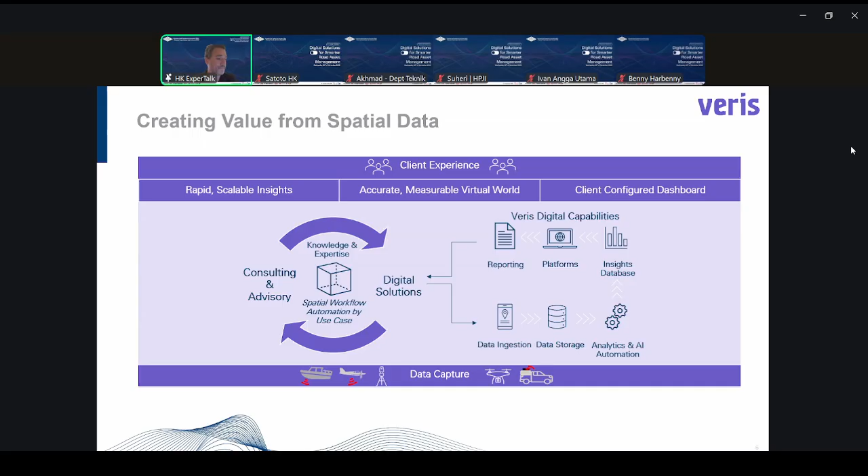We've got a number of solutions, and I'm going to talk about those today - around roadside, bridge side, and photo navigator that I think is hugely relevant to running road networks.

So if we start with roadside, we know that stopping by the road is inherently unsafe. It can be costly having crews out there all the time. There are mistakes made, not deliberately, but just through human interpretation. This is around using mobile laser scanning, which is a combination of laser scanning, directional cameras on board the vehicle, and 360 cameras like you get in Google Street View, using them all to get a better picture of the road. This isn't using just one data source, it's a fully integrated data source, all available through the platform, so the best data source possible to get the best insights to manage those roads better.

I'll take you through some examples of how we do that and how that's saving time and efficiency and bringing in more detail. Now, there's a number of camera-based solutions out there - they're really good, the dashboard-based camera ones, but they often don't bring the metrics that you'll see available through a combined solution with laser scanning that you can get of roads and infrastructure.

So this is a detail where we've got a little bit of a pavement failure along one of the roads here. If we're able to run our analytics along it, we get these red areas where there's a depression in a spot of a road like this. If you're able to present a contour in millimeters of this road at various threshold values, then you can start to understand, with the amount of detail here, what that pavement failure looks like and whether that's an actionable decision.

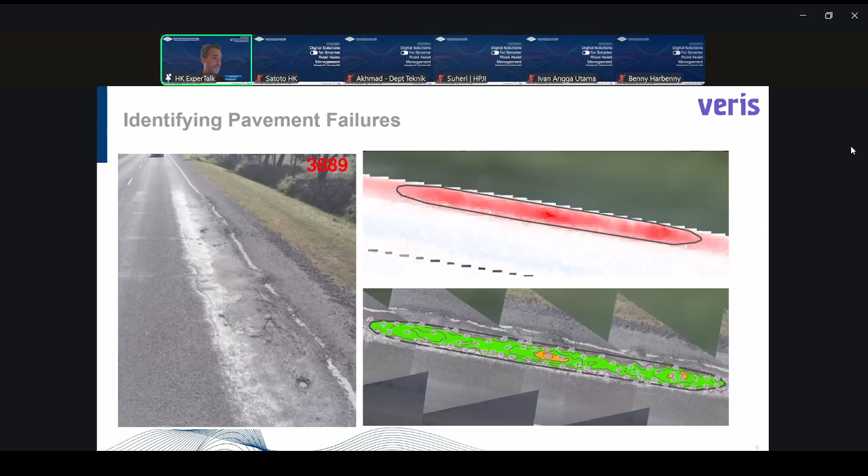Here the -12 represents -12 millimeters in depth. So you can get all those statistics and start to rank them in terms of severity of those various defects on the road.

One of the advantages of the solution, and we focus on the automation, is that we don't have a set kind of view of the software or dashboard. We build a custom-based dashboard with the information needed to manage that road at that time. So you don't get an off-the-shelf one - we work with the providers around what they want to see in it. This particular client wanted to see the severity of those impacts, and you'll see the look and feel of this change.

This was for a different client we were working with that was looking at the road network, and wanted to know the areas and severity scores of those various networks. They wanted a much simpler piece, so we've got the metrics there, and we get scores against things like cracking, rutting, corrugation, pothole. This is all automatically generated from the mobile laser scan data, and you can start to see this across here. I'll give an example of the platform soon, but it's having it in the map view and also in the kind of street view look as well.

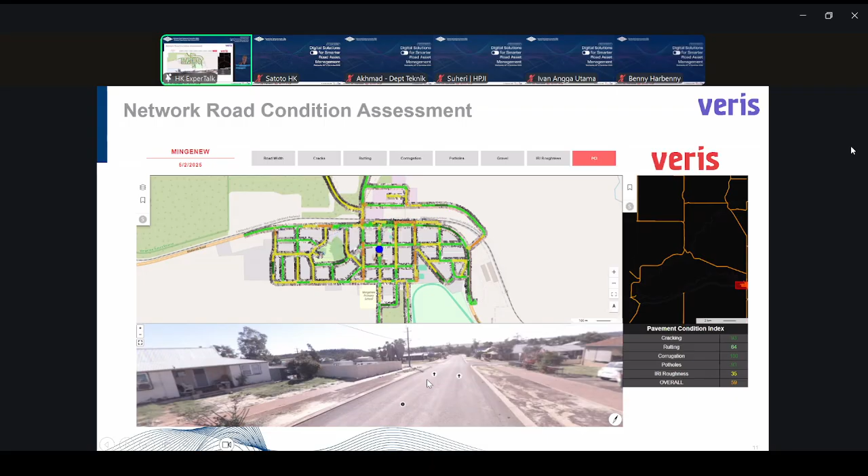Not only is it available for sealed roads, we've also got unsealed roads in this particular instance. Technologies like 3D radar are able to look below the surface and start to get an idea of gravel depth.

In this instance, we were topping up gravel depth across the network. By measuring gravel depth, we could identify areas which hadn't had any depletion and were already at the required level, so they didn't need topping up. This let us focus on the areas actually missing gravel. Here these sections are green, they're fine. Amber needs a bit more, and then another green area here.

This is a little bit on crack detection. You can see some of these here where you've got images. This is where AI is really useful - AI is really good for image-based analysis. You can start to identify cracks here, but often people and technology will identify cracks in a road and supply an image full of crack analysis, but that's not all that useful.

What you need to be able to do is take those images and place them in 3D coordinates over a map, so you can actually see where those cracks are in an integrated data set in a platform. Here you can see the crack analysis from the image of the roadside that we get, from a 360 camera that looks around the road and to the road edges.

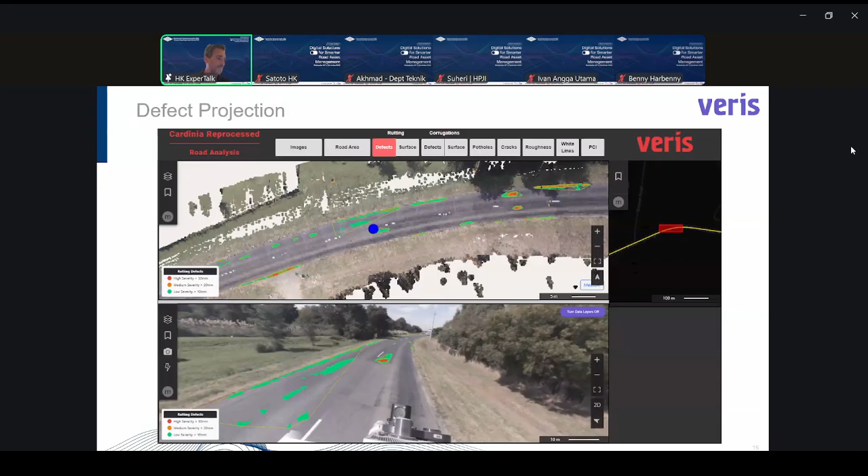One other example here is the point cloud - we overlay the point cloud of a crack and start to classify that crack as transverse. We can get descriptions of those cracks and these sorts of things. So again, another example of it.

And this isn't just done in Australia - this is done overseas. We worked with Hexagon on a particular project in the Middle East, in the UAE, where they sent us some data and we were able to run crack detection on this. There are tiny little cracks here - we can see the cracks along the road and then project it back into that map surface.

So here's a little bit of a video of roadside and the potential of digital in this space, which sums up what I've been talking about.

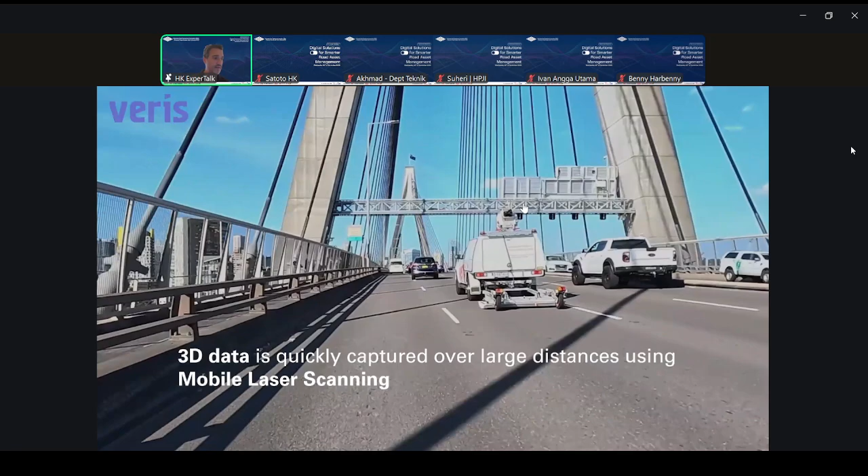As you know, traditional inspections are fairly labour intensive, and often unsafe - a lot of environments are very difficult to get to. Something like mobile laser scanning, you can see on top of the vehicle here - it's got the mobile laser scanner and the 3D GPR sitting behind it. That can drive the road, picking up all that data very efficiently and quickly without stopping. You can do surface deviation en masse across a lot of these road areas, and start to look at the areas with the most critical concerns. Diving into that level of detail around defects such as rutting, potholes and cracking is really important for the management of those roads.

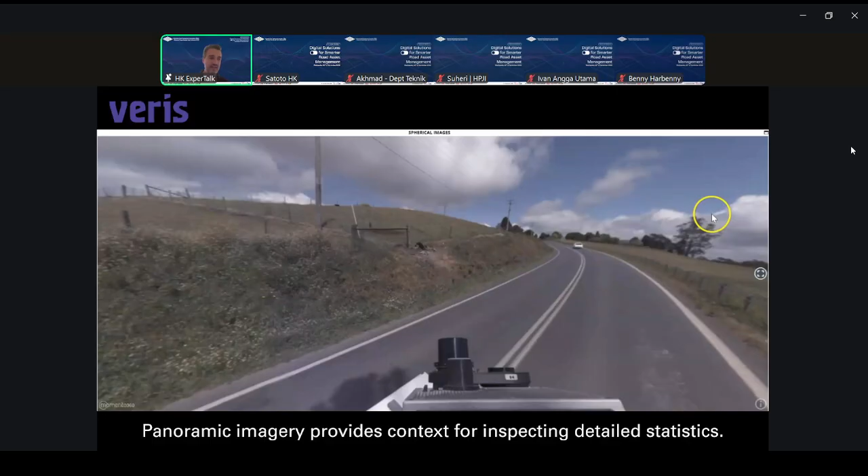You can also look at other things there like white lines and road width analysis and other bits and pieces. But then I was talking about the context, bringing in the imagery, the street view type look of it, to go understand the context of what's actually happening.

It's being able to drill deeper. So if you get a PDF of something like this, you're not able to drill deeper in it. It's pretty limited what you can do and what you can read. Having it in a digital platform enables you to manage both on scale, but also dive down into a lot of detail.

Here's a little bit on unsealed roads and looking at gravel depth, where we're able to analyze that. But again, it's going back to the image to identify these areas where gravel might be missing and zoom around and see what's actually happening at that site.

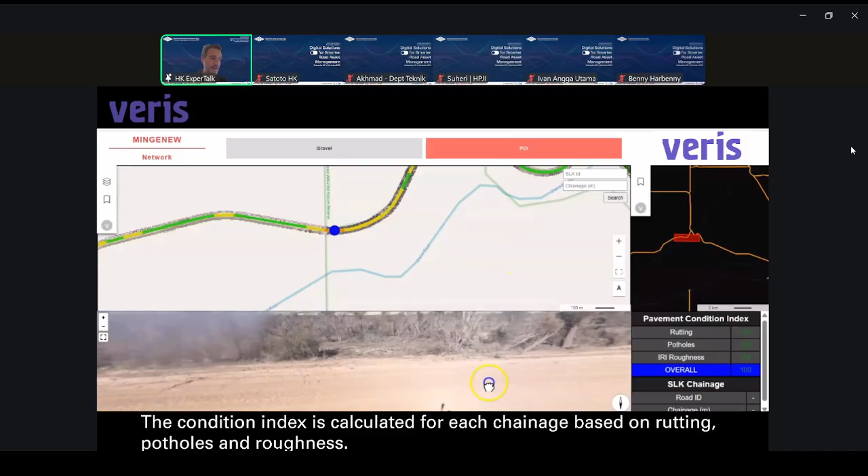Around the vegetation that was impacted in this road widening project, and to identify which vegetation would be impacted by the road widening itself, so people could know what's happening to the trees outside the front of their house or their home or their property, so that they knew what was happening.

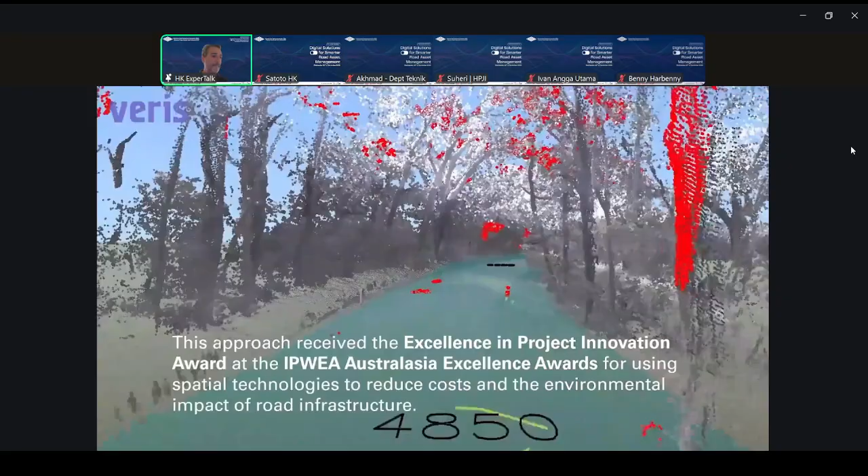Some of the key benefits, and you can see here the point cloud in the background that is provided by LaserScan and the level of detail. It's a large volume of data. You need a lot of capability to be able to analyze that en masse.

But then you can get much deeper insights and start to extract things like road signs, guardrails, vegetation encroachment, all these sorts of things. So you've got a complete asset map at one pass, not only the pavement condition, you've got those assets there, you've got vegetation encroachment and potentially road safety as well.

So we conducted this, a platform called RoadSiDe. We did it around a mining area here, and we were able to provide that level of detail where the company in this particular instance gave us a 9 out of 10 and said exactly what we need to understand the state of our roads.

So it's about scalable automation when you get in digital. You just don't want to do it on a local area. It's about automating at those larger scales. You're getting the high detail from mobile mapping.

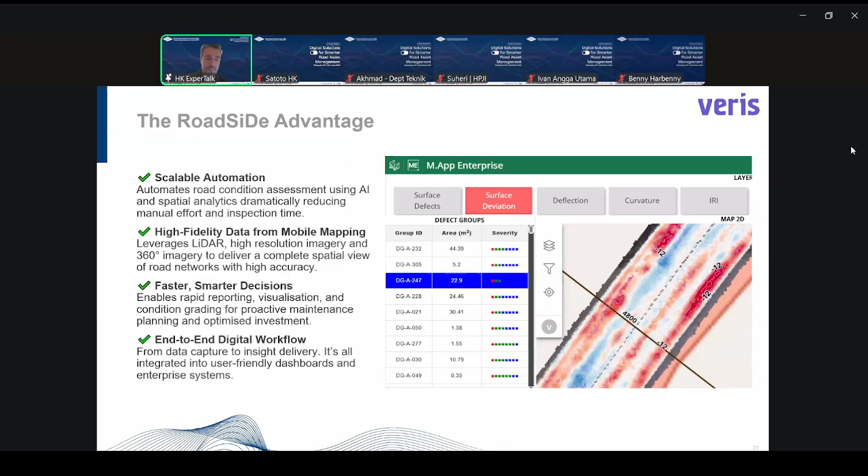Complex structures to analyze and very difficult to understand the state of bridges, and you need a lot of expertise around the engineers there. So we're starting to use UAV technology and other mobile technology around this to capture the state of bridges and then combine that with AI and analytics.

So if you look at something like a drone survey here, all these little blue dots are drone images, you can go create or reconstruct a 3D model of that bridge. And so here we were able to construct a 3D model of a particular bridge. You can see the bridge there on the left and the photo taken on the right of this UAV image.

Part of the management of it is being able to understand the structure of the bridge. And so really important when we do this is that we create what's known as a level of detail 150 model. It's got a model of the main components of the bridge so that when you have the defects or other such things.

You would typically do this in a PDF report rather than presenting a report, you can attach all the defects and anything you see to the actual BIM model of the structure itself, and then you can start to report by element.

So not only is it about visualizing it, it's being able to create a report that's working in current systems, and that could be something like a PDF that's spat out, but you know it's been digitally generated. And so if there are changes to that, you can make those changes, and particularly changes over time.

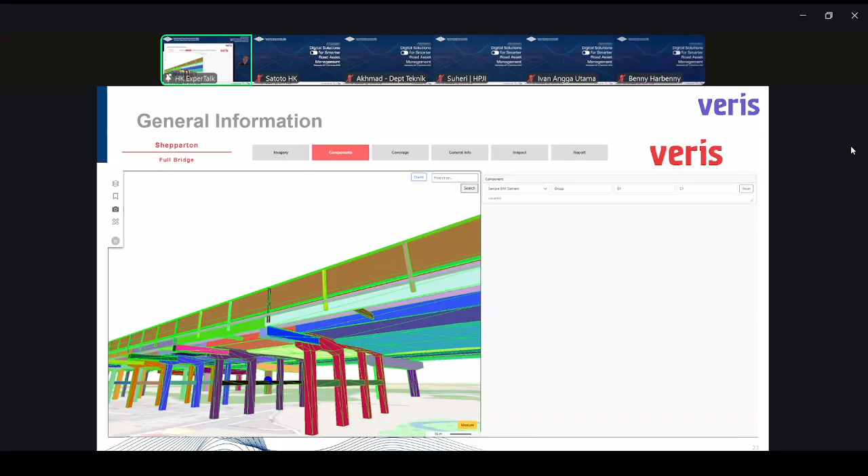Here we've got an analysis of which areas of the bridge were covered, which areas were gaps. Those white areas there in the mesh model were not covered adequately in the mesh.

So we can get some quality scores and quality indexes around when these are generated. And then I love this bit - this is the bit of sort of AI. We can start to search these models around what is actually located.

So here I searched this bridge for graffiti, and it's able to identify graffiti on the bridge by a probability. A red triangle indicates a high probability, a yellow triangle is a moderate probability of that being graffiti, and you can see how well aligned it is here. For the bridge that I was showing you before, I had typed in spalling, and we're able to find the spalling and be able to locate this.

And then we call this an AI guided search. AI is still in its infancy in some of these ways and still has a long way to go. It's not as reliable enough, but it can guide an engineer to the locations they need to look at much more smartly and much more efficiently than just purely trying to search these features.

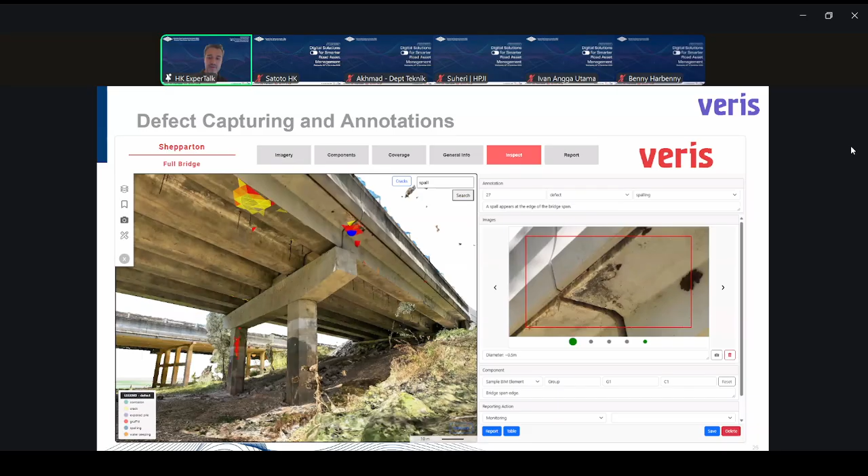One of the things that is a little bit different is crack detection. So using these images here that are taken by the drone in this instance, you can start to map these crack features back on the bridge model. And that's using a combination of that sort of 3D projection piece.

And then you've got all this sort of basic thing. This is just taking a measurement around this sort of drainage and starting to enter this in when you're trying to do your digital inspection. So you can add your digital inspection all through these, filling out drop boxes and little text boxes.

That then gets fed into a report that is generated at the end. And so it's all linked together. The visual is linked together with the inspection, which is linked to the report, rather than looking in one platform and trying to fill out an Excel spreadsheet and trying to fill out a Word document and take some notes. You've got it all together in one package.

Ultimately, the road bridge maintenance authorities want a table like this at the end. So this has things like quantities, what issues are found, and all these sorts of things. You're all tracked through this. And if you click on one of those features, you can get a visual which you can understand the context of it, and you can start to get that report back in.

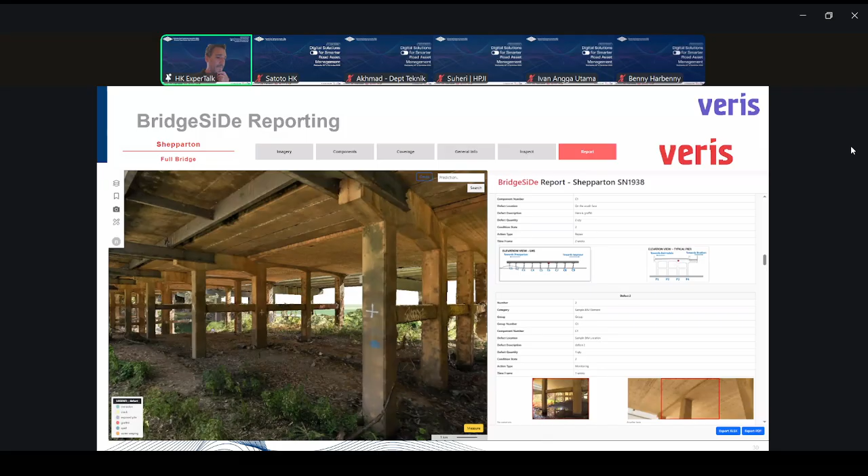So here's a little bit of the BridgeSiDe video here.

Just a quick question, can you hear the audio there or not? Because otherwise I'll talk to it. This is the only video with audio. We cannot hear your voice or video from video. Okay, no problems, I'll talk to it as well.

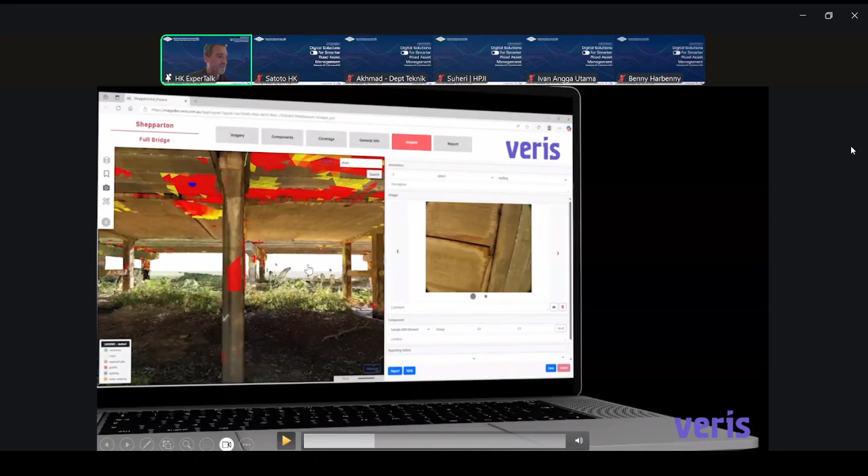This is the bit where I was talking about AI on the video. So here I typed in the word stain, which is leading to a water stain, and it's able to find those particular pieces on this bridge itself.

So this is where I talk about the AI guided inspection as well, where the engineers are led to places of focus.

It's about linking the whole workflow together and not having disparate pieces all over going from one software necessarily to another.

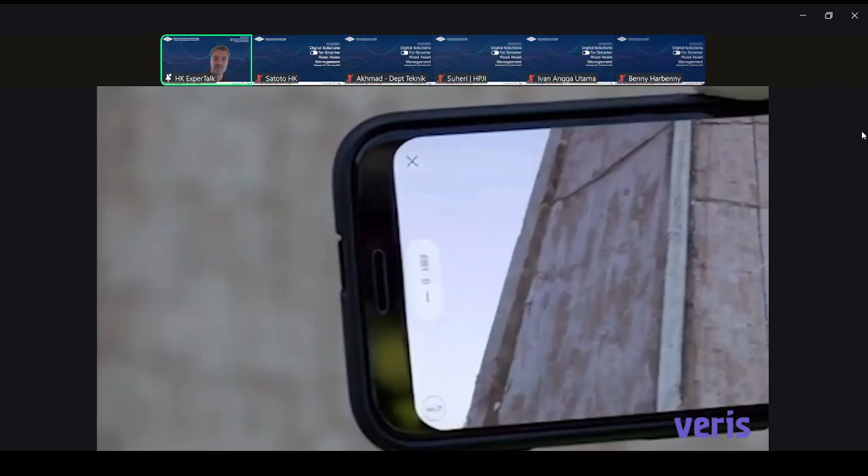In this particular app, it's about keeping it updated over time too. So if someone goes in the field, they can take a photo and upload it to the database. And that way you can know how things are changing because you've got the baseline that was originally captured.

And so what you saw there is really around virtual inspections, transferring some of this from a physical inspection to a virtual inspection piece. Really relevant for areas that are highly complex bridges, remote bridges that are difficult to get to, or anywhere you need a lot of equipment around it, like elevated work platforms, barges and other sorts of things. Drone technology and the likes are coming along a long way.

AI-enhanced detection is getting far more popular in this space, is far more relevant and far more useful than it used to be, and making that flexible enough that the engineer can search for what they are after.

So a lot of AI models are really well trained for one thing, but can't be flexible on a broad range of things. So the AI, say, for instance, we've built, you can search for a number of features on that bridge. You could even search for wood or the color blue or different sorts of things in there, and it would locate some things around that.

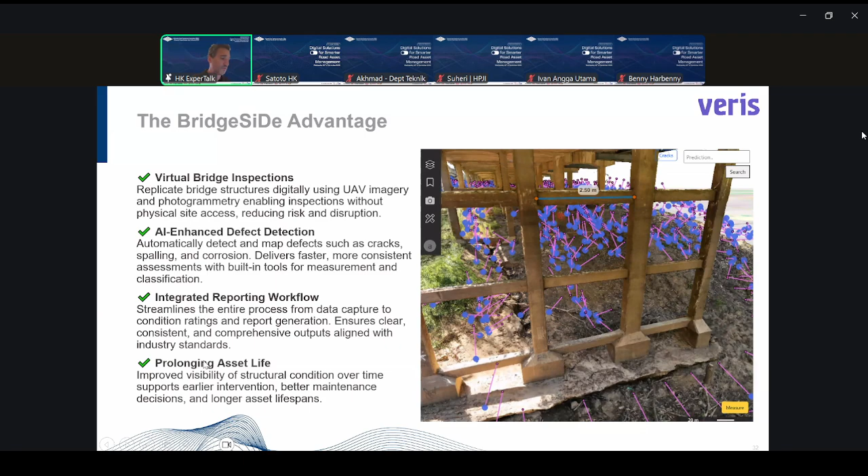The last solution I want to talk about is Photo Navigator. This was really built out of realizing mobile scanning isn't for everyone, and sometimes photos are enough. That's both 360-degree photos, like street view type photos, and straight directional photos, whether from a smartphone, a digital SLR, or other sources. You can combine that together to give people a quick view of a site so they don't need to visit it physically.

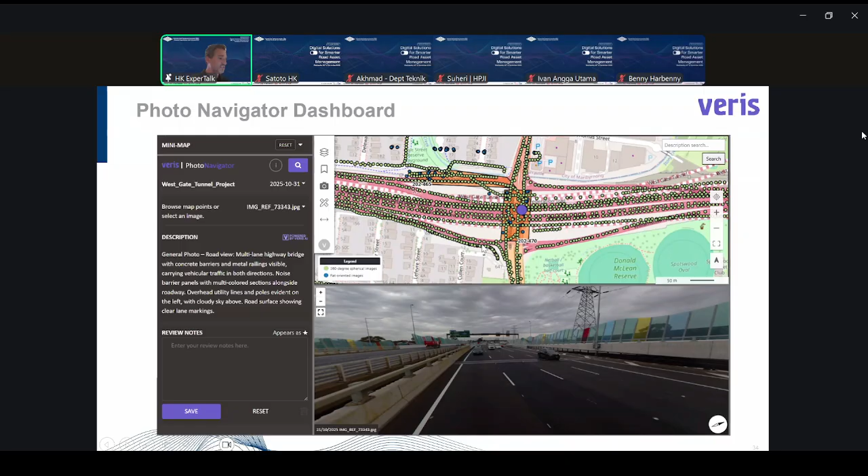This is a project we've got at the moment. We've driven all the lanes of this freeway and generate photos every 5 meters, but we can do it every 20 centimeters if we want - a bit of overkill. There's a range of assets located here, and you can visit any of these sites virtually by clicking on the images. The green photos are ones we captured, and the blue photos were generated by people walking around with stills doing virtual inspections. You then get descriptions of what occurs, which you can use for reporting. So here's a bit on Photo Navigator, which is a simpler solution for these sorts of things.

Here you've got the green images driven by vehicles - they load up and you can pan and zoom around. Then we've got flat images gathered by people walking the footpath. You can take these images, and as you can see on the left, use AI to describe what's actually happening - if there are potholes or cracking evident, you can get those descriptions and start to highlight areas of concern.

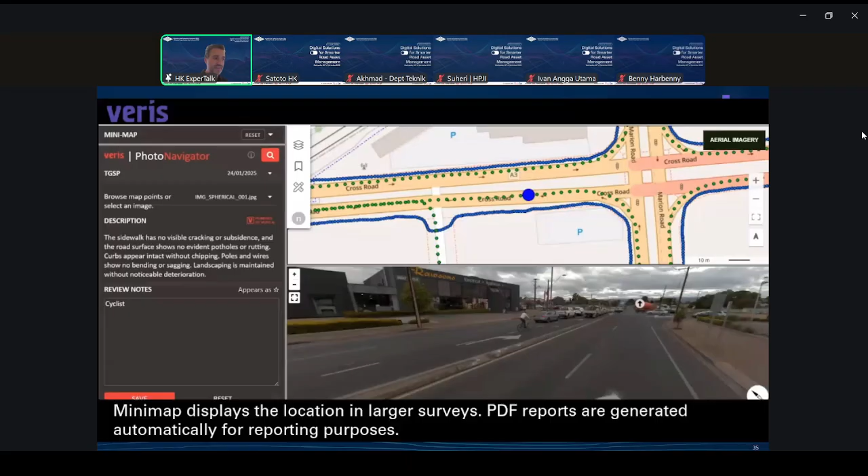The good thing about digital platforms is it really enhances collaboration. If someone takes a note, they can share it with everyone else on the platform. If there's an area of concern, they can type that in and others can access it. This is another area around Adelaide where we ran some data and built out the Photo Navigator platform from the data captured there. That's quite quick and easy to do, but you can build a whole range of functionality on top of this.

It's just got a little bit more around the notes and bits and pieces. We're also loading in assets now so you can get a report by asset type, saving a lot of time. One recent project had 150 reports that needed to be generated, and we saved an extraordinary amount of time by automating a huge amount of that reporting straight out of the platform using a combination of images and AI.

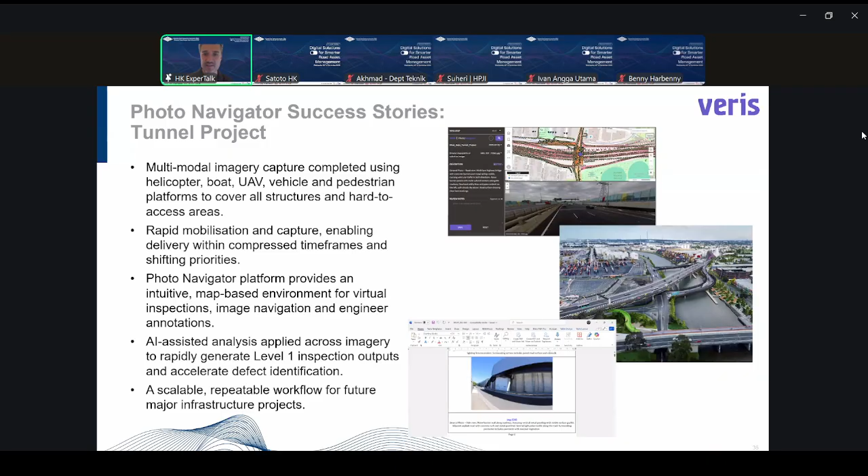Here's a project we've been running that I showed you before - we're able to take all the images gathered through helicopters, boats, drones, vehicles, and pedestrians, because you often need multimodal ways of capturing these things. You're able to do rapid mobilization and then push this out through AI assistance to generate the reports that have to be provided on handover to the asset owner, making sure everything's in good condition.

Really, it's about the simplicity of virtual access to that environment - you don't have to go out there yourself. You can visit that site, and it's timestamped, as opposed to Google where you just log in. This is timestamped to that particular period when you need to access it and know the exact conditions at that point in time. It leads to faster reviews and faster approvals of pushing this data out, and the AI tagging has that actual context associated with it.

So here's a bit I thought it'd be useful to show you, sort of an end-to-end digital workflow. This is really useful. You've got the data capture around something like mobile scanning, which sits on top of the vehicle here.

Then you've got the data processing piece, which is a complex piece to really know how to process spatial data, to get things like the point clouds, 3D mesh, to get a BIM model and various other things out of that. Once you've got that processed, it comes into data hosting.

We like to host the data straight away after processing so that we can get people starting to use it, but you still need to go through the feature extraction process. So we use some of Hexagon's software to do it, M.App Enterprise and Luciad, and have spatial databases beside it, but you can use a range of software to potentially do your data hosting.

Then it's around feature extraction. So it's a combination of AI from the image, you might have spatial analytics from the geometry of things like the point clouds and the mobile laser scanning, and automation and scripting, enabling the virtual inspections so the user can use a dashboard to go mark that up.

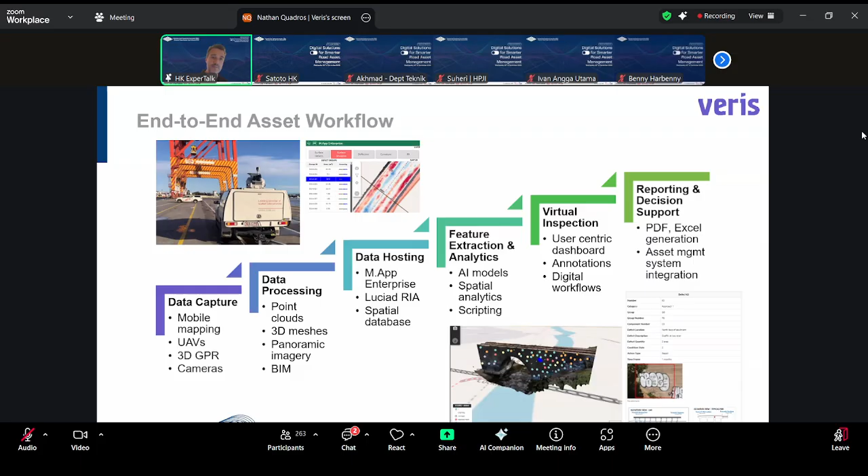Use the inspection and what the AI and analytics has seen to provide the insights, and ultimately generating PDFs, Excel, or if you want to go full connection into an asset management system, so that enables the reporting and decision making through that whole process.

So what's the benefit of this, and it's really around shifting from reactive to proactive maintenance. Proactive maintenance is much less costly than reactive maintenance. And so a lot of the goals of clients I've been talking to, and maybe it's a fictitious goal, but moving to 90% proactive maintenance and 10% reactive.

At the moment, a lot around 60-40, 70-30 splits around that. But if they can have more proactive maintenance, they'll be able to plan for that, budget for it, and do it in a more sequenced way, which will lower cost, rather than getting out there desperately at the last minute where costs are inflated. And so if you know the state of your roads or the state of the assets, you can be much more proactive about it.

And as you start to get a series of data over time, you can start to predict that. So if a crack is this long one year and it grows by 10 centimeters the next year, you can start to do some prediction around how that crack length or width might be changing. Similarly with potholes, pothole surface area and depth. So it's around using that and some of the physical insights around that predictability.

So it's being able to do this and visualize at scale, and automate the detection, and then ultimately reduce that spending and increase the longevity of those assets.

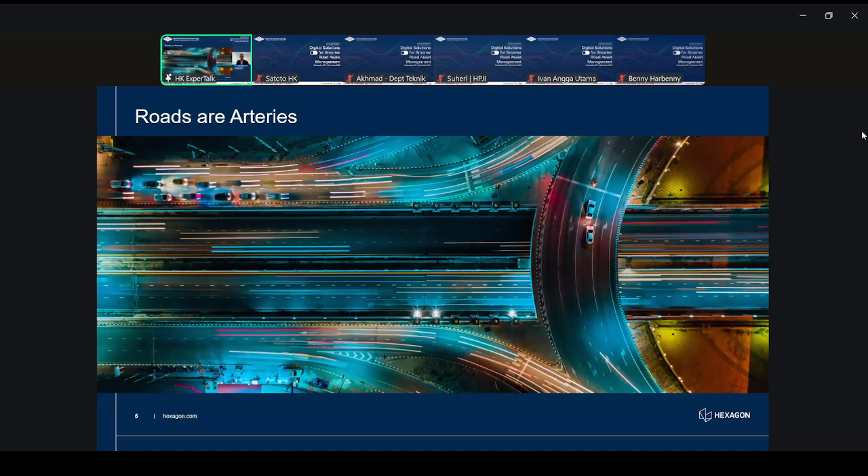So let's get started and answer the question, why? Why tackling the key challenges with road asset management systems? As you know, roads are the arteries of our cities, and when they are healthy and smooth, everything flows, we are all fine, people are good, and services are running well. But when they deteriorate, the entire system feels the impact. So we have issues with safety, higher costs, and also wasting time. So why do we need these road asset management systems?

First, we need, as fast as possible, real-time data collection to close the gap for decision-making. It's really important, and I'm also glad that Nathan underlined that during his presentation, showing the relevance of capturing data efficiently and fast. Second is about predictive and condition-based planning, which helps with the asset value loss. Then we have the financial part: we need data-driven financial planning that really ensures optimal use of resources.

The integrated and collaborative approach, and the software solution that was presented by Veris just before, is a perfect example of this. Having a collaborative platform where every data is stored and shareable among the different stakeholders is key, and I think that was a very good example for that.

Then, of course, we need to consider that this needs to be scalable. We are talking about huge amounts of data, hundreds of thousands, or maybe sometimes for some countries, millions of kilometers of roads. And that requires a very solid system to be used.

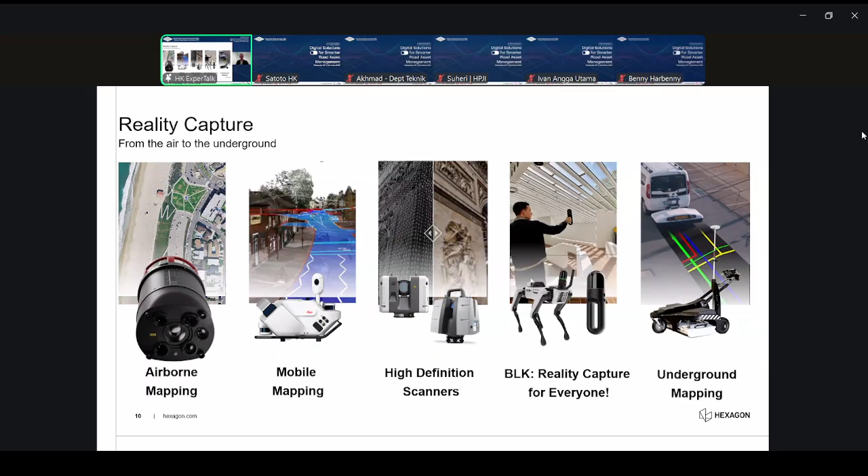So here is the mobile mapping solution family, the different products that we have launched over a certain amount of time. We started mobile mapping more than 10 years ago, I'm talking about 2011 when we started. And this is now the latest generation of the famous Pegasus mobile mapping solution. I will give more details afterwards.

The next question I would like to answer now is what road asset management system challenges mobile mapping can help solve today. It's a matter of fact that in every country there is a huge network of roads, from high speed to local roads within the cities. Every category of road plays a critical role in keeping the country moving.

But maintaining such an extensive network is not simple. It requires accurate monitoring and early detection of issues.

We have different indicators used to define road quality, which is something you know very well. The three main ones are the IRI, the International Roughness Index, the PCI, the Pavement Condition Index, and the rutting analysis. IRI tells us how smooth or rough the road is, PCI gives an overall score for the pavement, while rutting looks at the deviations in the wheel paths, which can be affected. Detecting these elements efficiently and in advance will help with road maintenance.

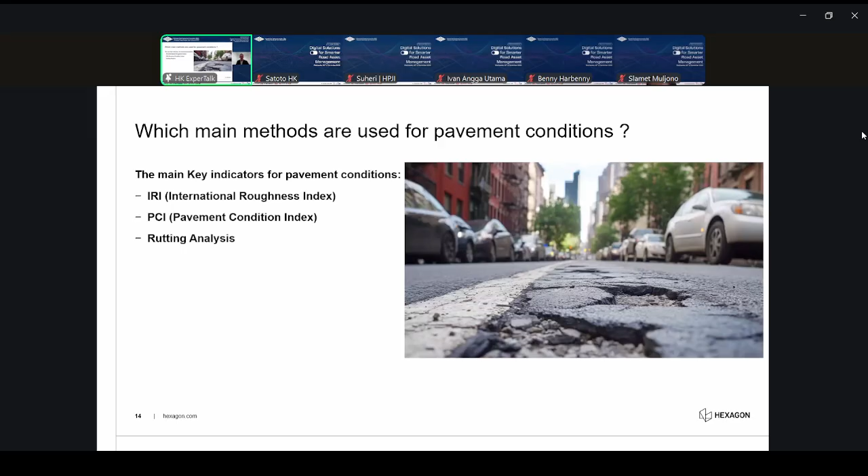So what could be the advantage of using mobile mapping solutions, and how can it help road asset management solutions?

First, it's clear that we can accurately and very quickly collect information. Today, we can capture hundreds of kilometers in one day, and that vast amount of information can be treated mostly in real time, and this speed and precision empower better decisions.

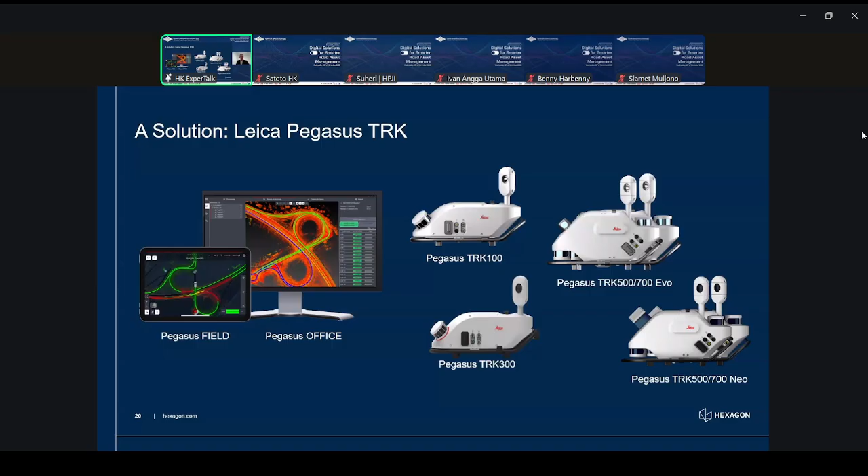About the family itself, we have the mid-range solutions, which are the TRK 100 and TRK 300. They are ideal for routine and road surveys. The TRK 100 is lightweight and great for urban areas, while the TRK 300 offers extended range for longer road corridors. But for high-end applications, we move more to the TRK EVO and NEO systems.

They are available in single or dual LiDAR configurations, delivering ultra high point densities and accuracy. This is, from my perspective, essential when it comes to detecting cracks, rutting, or surface irregularities. So in short, TRK 100 and 300 are perfect for standard surveys, while EVO and NEO are the most recommended solutions for pavement condition assessment.

So maybe you were wondering, what is the workflow? As I mentioned before, with the different sensors we have, it relies on three steps: capture, prepare, deliver. It's quite straightforward, but we can also capture and process data in real time.

That's something unique with our solutions. If you activate the real-time kinematic, you can process right after the mission, on site, which can be beneficial for various applications. Of course, you can also choose to process everything in the office, which comes to the standard workflow to reach maximum accuracy possible.

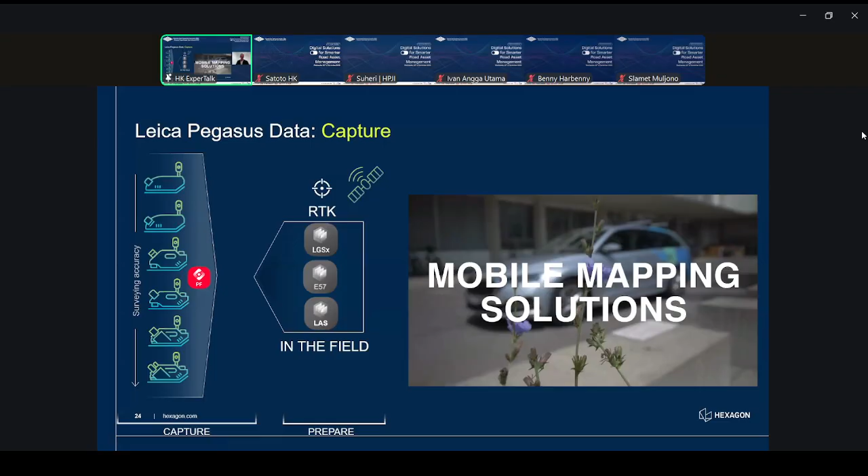So let's start with the capture of the data, and here it's quite straightforward. You will see, I hope the video will run smoothly, but you will see that it's a very easy installation.

One person operation, so it's a light system. Here we have a TRK 500 Neo, which can be installed by one person only. And we have a rotating tilting platform which allows installation in a more convenient way, so there is no difficulty to install it.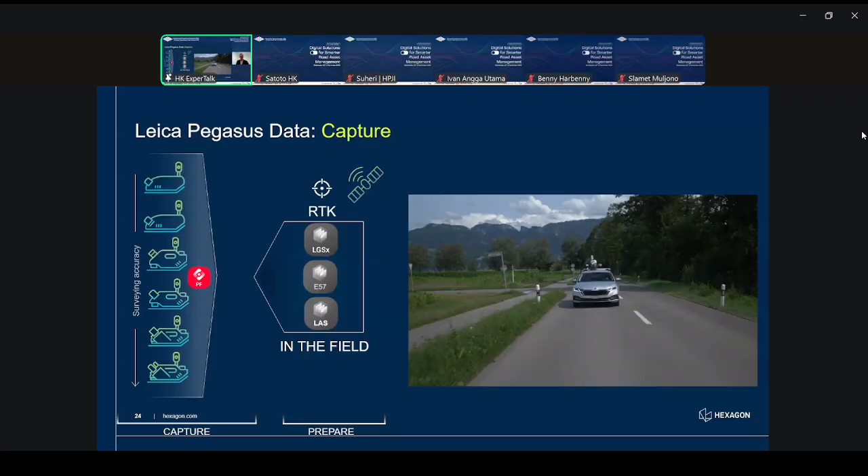Then the acquisition is done from the car with a direct connection to a tablet. You see live all the information of your data capture, which is the point cloud, but also the position of the car on the map, the accuracy of the positioning, and all the cameras used for the capturing part.

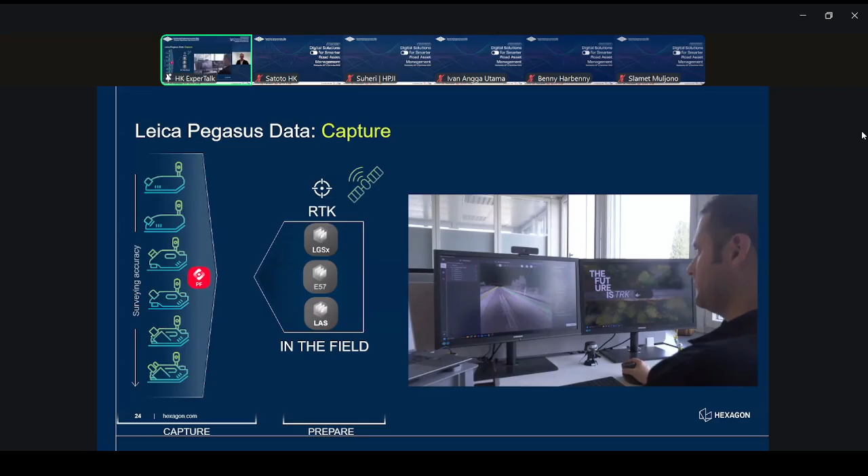Maybe you do not see that clearly on the video, but we have the capacity to add up to 8 cameras on the system, in addition to the 360 camera, enlarging the capacity of the system. Then comes the processing, visualization, and QA/QC of the data, everything that needs to be ready for the next round.

So the next round is about, as I mentioned, the preparation of the trajectory, the calculation of the data. And I would like to share with you some very powerful concepts we have developed for cloud to cloud comparison.

Here we have a very good example that is used. We have captured this road in different directions with the scanners, and I hope it will be clear on the screen because it shows you the different passes we have operated with the system. In the end, we have a layer of the street which is close to a few millimeters.

This road was captured also with a tunnel, and we have extracted a portion of this tunnel just to show you the results between 6 different passes. We are really talking about multiple passes done in this tunnel, and we were below 7 millimeters in terms of differences for this tunnel.

So tunnel is also a very challenging environment, and this is part of the assets that we are able to capture efficiently and accurately from the system. There is just a mistake... this image is from the... oh it's okay, perfect.

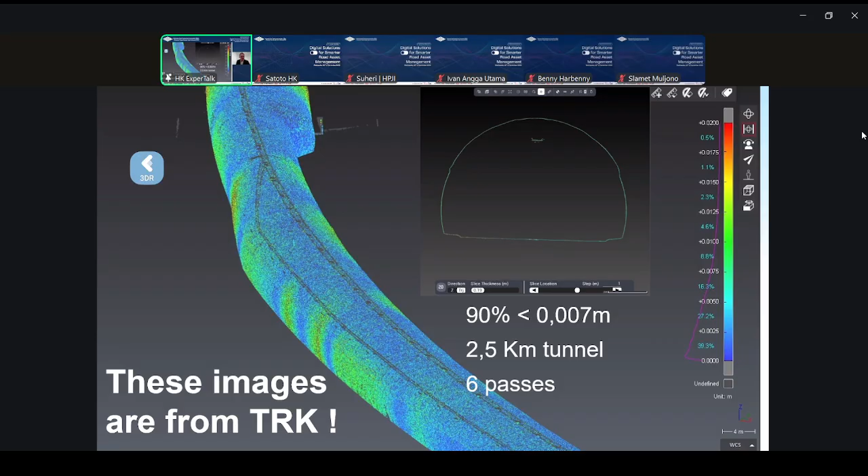So let's focus now on the pavement analysis, and I will take an example. I mentioned roadside, Veris was mentioned in the previous presentation, but here I would like to show you another workflow that our customers are also using, with the software named Topodot.

So again, we are capturing the data with the Pegasus, preparing the data with Pegasus Office, and then we go through the different pavement condition index, or IRI, or rutting. And how does it work?

Let's start with the pavement condition index. Here we are loading our information directly into the software, and the software is running some automatic extraction. As it is not AI, it is really analytics of the point cloud itself, so it's very important to have a very clean and dense point cloud to make this analytics, which is why we are very strong in offering our solution for this application.

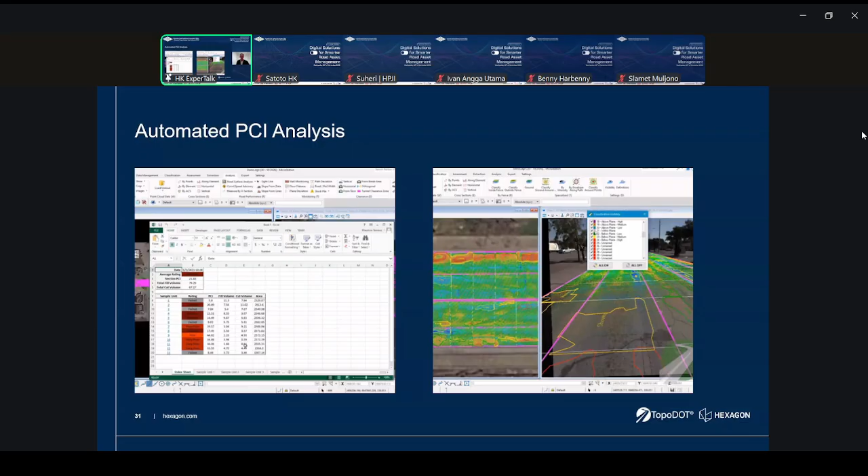And then you get some reports, which in this case can be an Excel file, but can be used afterwards for sharing with any stakeholders. Another part is the rutting, with examples of the rutting that you can see here with the report as well, and the IRI.

So IRI is a new feature developed by Topodot. It was not existing one year ago, but they consider it an important market, and they wanted to prove that they were able to process this IRI precisely. They compared the results with a very well-known solution for IRI calculation, which is ProVAL.

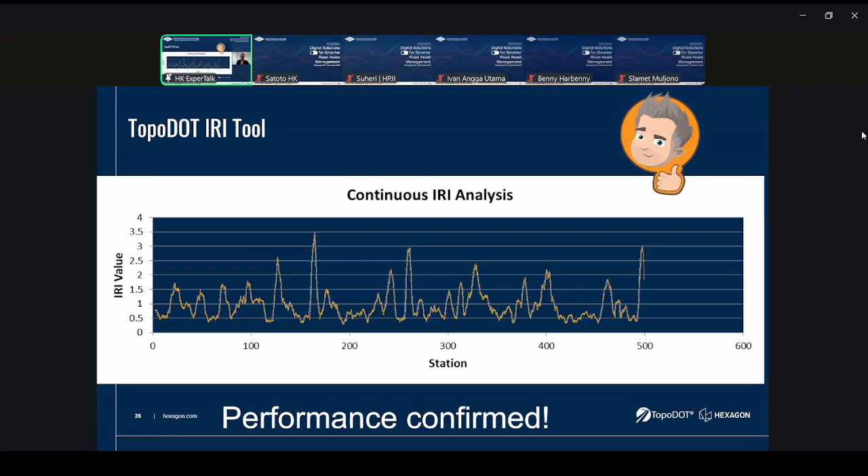So they extracted their results from different data sets we provided to them, and compared them with the ProVAL results. The comparison was matching perfectly, so for them the conclusion was that the tool is working well. Since then, we have a lot of customers that have been working with Topodot and integrating this solution.

Here you see, I don't know if the video will play smoothly, but here you see the suspension of the wheels and the results with the different colorization of the IRI based on the extraction that was done. So it's an easy workflow from the capturing, processing, preparing, and delivering part.

Now I'm reaching the last part of my session, and I'm very glad to share with you two use cases that we have had the pleasure to work on.

The first is a conference that happens every year, the European Road Profile User Group. It's part of an initiative that is also performed in the United States, so it's a very important event. Last year, tests were launched to benchmark different solutions, and we participated in these tests, and here's what it is.

This Road Profile User Group has been established since 2012, and it brings together road owners, data providers, and researchers to focus on road condition and surface profiling. It was really a challenge for them. They wanted to evaluate different solutions because until 2023, the solutions used a lot for this kind of analytics were laser crack measurement systems, but they require very big hardware, and they wanted to evaluate if we could use different solutions for this kind of application.

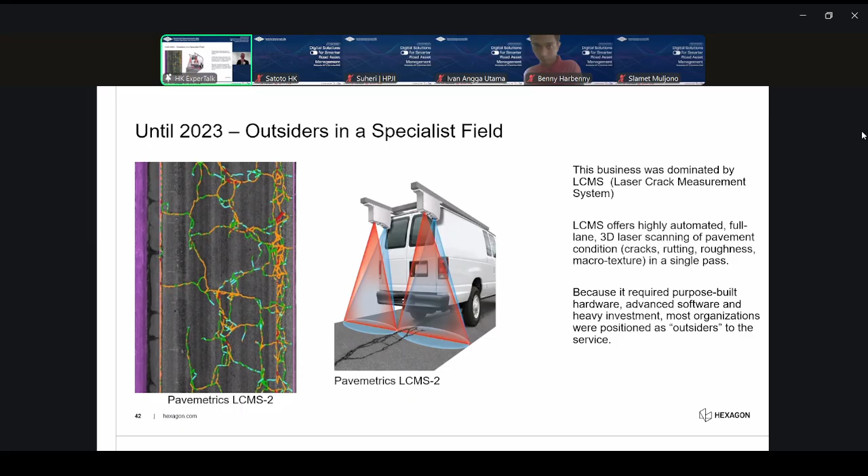That's why they launched this test, DuraBASt, in 2024. The purpose of this test was to capture, with very different solutions - profiler, mobile mapping, and also connected vehicles - a site that is used for calibration in Germany, which is renowned and used for this purpose.

Here you see the different solutions that were used for this test - all the profilers and all the mobile mapping solutions, with different providers participating. In our case, we participated together with Roadside. We captured all the information with the TRK 700 EVO, and provided this information to the Roadside team, to Nathan Quadro's team, who extracted information which we returned back to the DuraBASt team for evaluation.

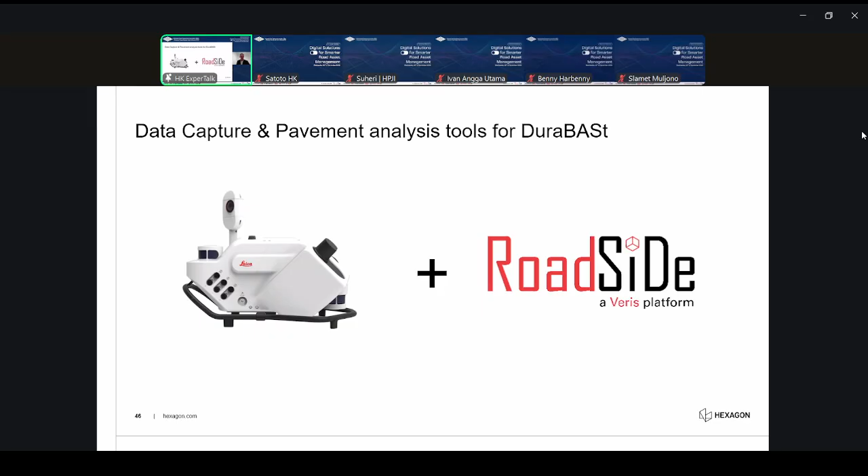Here you see an example of the site that has been captured by the TRK - this is the navigation to the 360 images and also the capacity to switch to the side camera. The point cloud has been classified using an artificial intelligence algorithm that we use to set the point cloud into different classes, helping to focus only on classes that are relevant for our extractions. Here you have a fly through, which I hope is smooth enough on your screen.

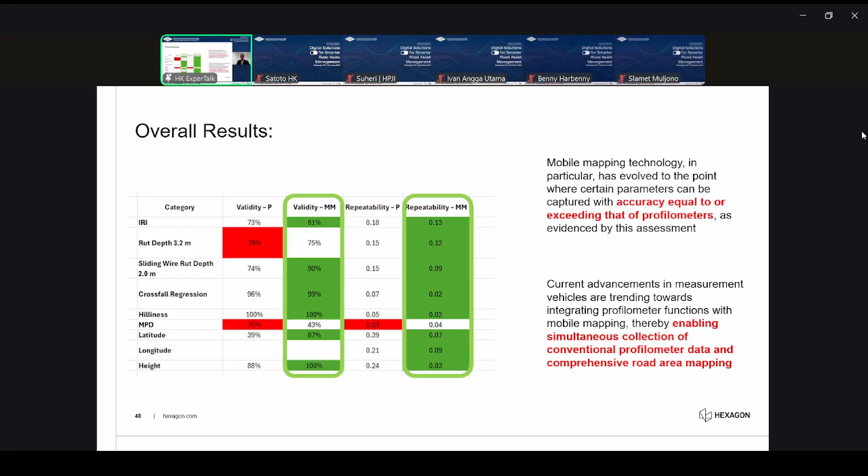The conclusion of this test was extremely positive because, as you can see in green, the mobile mapping presented the highest repeatability and the best results for most of the different elements that had to be extracted. Of course, we were not the best everywhere, but we covered a lot of the main parameters that define pavement condition. That was a very important finding for this community, because it was proof that now mobile mapping can be used efficiently for this activity. And as I remind you, it's not only about capturing the pavement, but also all the assets around.

The second use case is, in a way, similar, because this topic of pavement analytics is extremely important in a lot of regions. We had the chance to perform exactly the same test in Hungary. In this case, the project was initiated by MKIF, who wanted to check the repeatability and reliability of different systems for pavement condition measurements. The motivation was to evaluate how mobile mapping, as a promising solution, can bring efficient information.

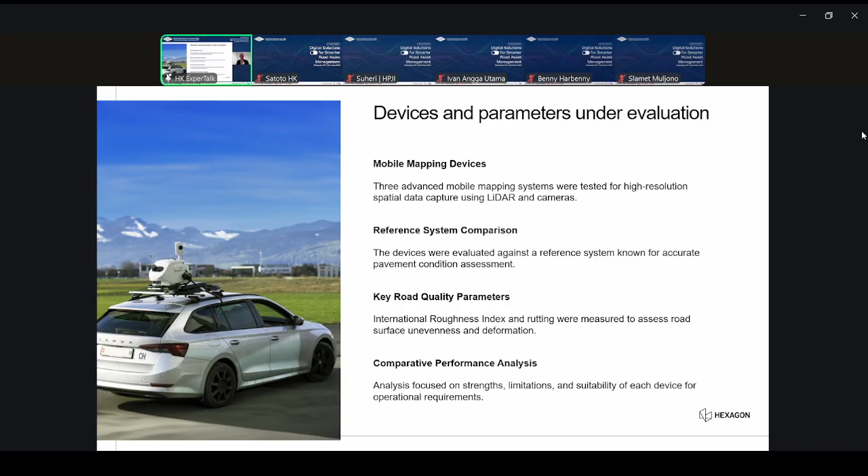The idea was to test different solutions from the market and confirm whether it would be valid for this application. Different mobile mapping devices were used for this project, in total 3 advanced mobile mapping solutions. There was a reference system comparison, so all 3 were compared to this reference. We extracted the key parameters for this project - IRI, rutting, and also PCI. Then a comparative performance analysis was performed on the 3 different captures to determine which one was the best.

In this case, we used the combination of the Pegasus TRK700 Evo and the software Topodot. We captured the site at many different locations, at very different speeds to evaluate which could be the best speed for this capture, from 30 km/h to 105 km/h. You can imagine that if the results are good at this speed, you can capture a lot in one day. Then we evaluated how fast the data processing could go with the different solutions, and how accurate and repeatable these results would be. The results of this test were also a good confirmation that we are on track.

We have tested all the MMS, but we showed the best performance with a very reliable repeatability across the multiple evaluations. It was important to understand that a system with a good calibration brought the best results. And as I believe, other players will decide to move to this mobile mapping technology for their pavement condition.

That's really it, I'm reaching the end of my presentation. I like to finish with this quote from Abraham Lincoln: the best way to predict the future is to create it. We have a lot of different articles you could find on our website, so I'm inviting you to enrich your knowledge with the different solutions and articles we have written so far. I will be extremely happy to answer your questions afterwards. Thank you very much for your attention. I apologize again for the cuts during the presentation, please reach out to us if you have any questions. Thank you.

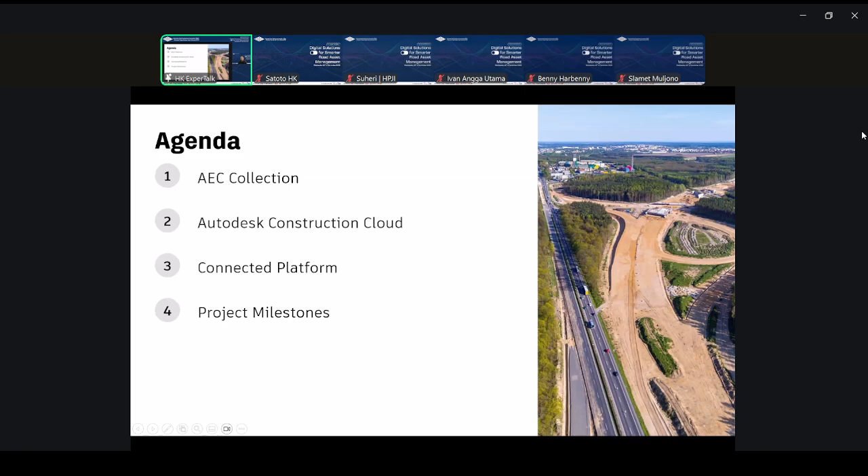We at Autodesk also believe digital transformation is critical for our customers, for all of you, to achieve your sustainability commitments. Over the last decade, technology transformed so much.

As you can see from the last decade, especially during COVID, technology grew so much that between 2010 and 2020, global data generated went from 2 to 60 zettabytes. Just to give an illustration, 1 zettabyte is around 1 billion terabytes. So data is now everywhere.

Automation can connect the process. Platforms can connect you with your value chain partners, customers, and communities. Only through digitally connected processes and data can companies unlock the ability to achieve and direct their impact. We have to move past assessing and reporting impact after the fact. We also need to virtually model, simulate, and visualize the impact before it is real, while it is still cost effective to improve our actions.

There's also a fun fact from IBM. They did a study on sustainability impact, released several months ago, interviewing 3,000 CEOs from around the globe. Those CEOs who report deliberately aligning their sustainability and digital transformation efforts are realizing substantially higher growth than their peers.

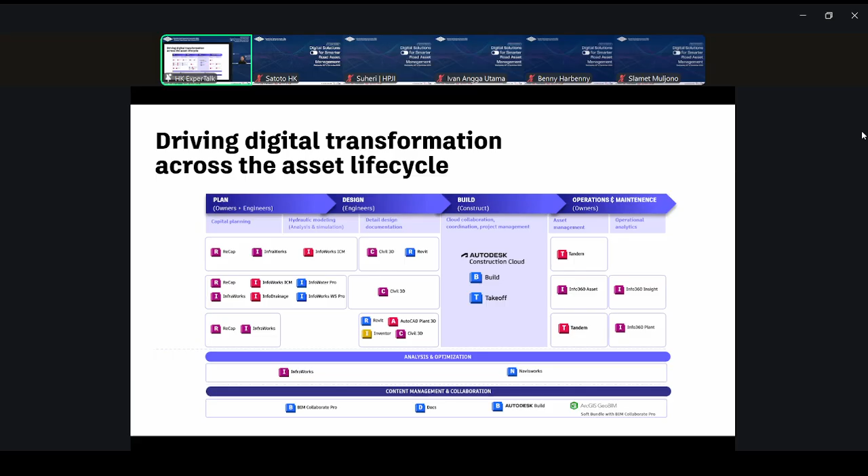We have tools like InfraWorks, Navisworks, and so on. You can make analysis, collaboration, and optimization part of the standard flow, while cloud collaboration and content management keep everyone working from the same source of truth. There will be no silos, no guesswork, and no finger-pointing on each project. With soft bundles of BIM Collaborate Pro, project teams can get the coordination muscle they need without the friction.

Let's move on to ACC, Autodesk Construction Cloud. This ACC platform can fit within the project life cycle across the whole platform, showing how data moves from plan to design to build to operate. You can see all the lists here - there are functions within the platform in each phase. We will take a closer look at these functions as we move into the project milestones.

You can also see and zoom in on what Construction Cloud brings to your project teams. Imagine empowering builders with seamless field execution and project management, so everyone can collaborate and deliver on time and on budget. Estimators can get more accurate takeoffs, BIM experts can improve constructability and transparency, and every project team member can access the files they need, all in one connected platform - from project management and quality control to automated clash detection and document versioning.

ACC, Autodesk Construction Cloud, keeps your data organized, your workflow streamlined, and your teams in sync. With dashboard reporting and predictive insights, you are not just tracking progress, you are spotting risks and driving efficiency. This is how modern construction gets done smarter, faster, and together.

With each step of the project life cycle, there is potential for data loss. Again, I will mention the data assets. As the project progresses, this loss can become more and more critical. It was thought that BIM, Building Information Modeling, would be the solution to data loss - the silver bullet. While that is a key part of the solution, it is not the only factor.

A unified platform where data is available to team members during all phases is critical for the success of a project and helps avoid the costly loss of information when data is handed over between personas - for example, from owners to planners, to designers, to contractors, and back again to the owners between project phases.

Let's move on here. This is a bit of a historical story. Back 30 years ago, drawings were digitized. Recently, groups moved into the BIM phase to create more intelligent models. We've all done it, but what is the ultimate goal? It is data management - digitizing design and construction and providing access to data-rich assets.

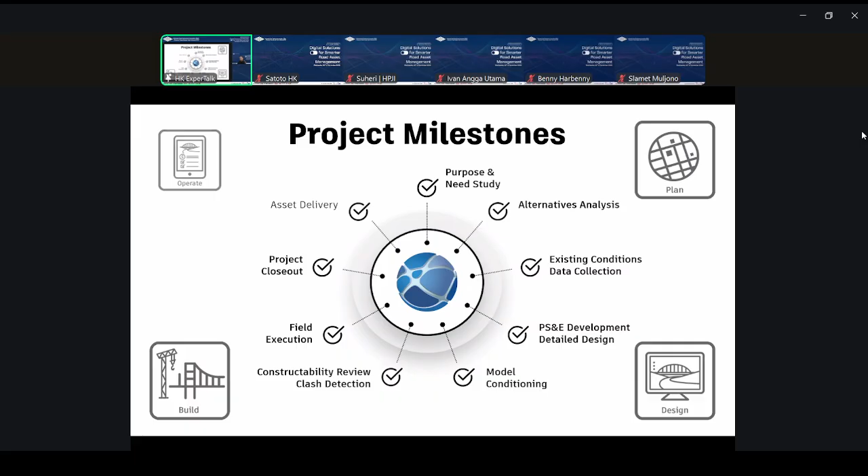So we can move on to the project milestones and dive deeper into the phases that generally have several key milestones. Each phase has several key milestones that can be benefited and enhanced using AEC Collections and Autodesk Construction Cloud. Here are a handful of milestone examples in a typical roadway project, from plans, we move to design, then build, and lastly the operate phase.

So we can move into the plan phase - let's look at some of these typical activities, their purpose and needs. Here, the owners and planners will evaluate traffic needs and projections. They will assess environmentally sensitive areas and develop alternatives for designs. The alternative analysis will help determine the preferred alignment alternative based on factors such as environmental impact, asset and performance, public need, and cost-benefit ratios.

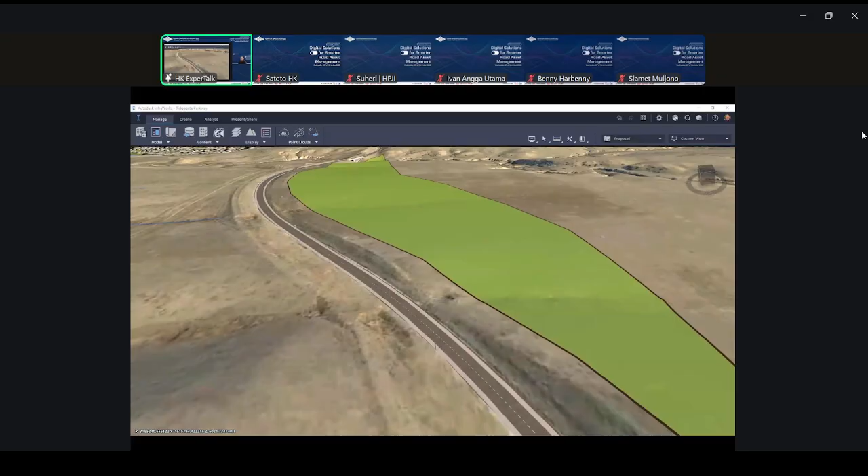It connects the freeway interchange from major subdivisions, and it needs to be expanded due to demands. The owners and planners will use the traffic simulator in InfraWorks as part of the purpose and needs study. They could also identify environmentally sensitive areas and include them in the studies to aid in the alternative analysis. Different or multiple road configurations can be created in InfraWorks as a concept road.

They are displayed in the contextual environments. This design alternative can be stored and accessed within Autodesk Docs or ACC, where the folder format is set up according to the project needs. You can save it as a template, by the way. Additionally, anyone with project access permissions can view the InfraWorks models in the ACC viewer. So project owners don't need to have InfraWorks access or install it on their machines, just access Autodesk Docs or ACC to view the alternative.

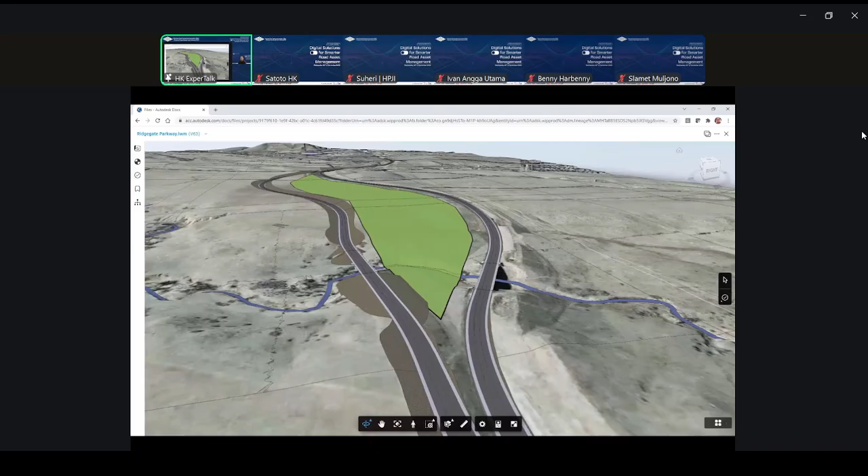Next, we can dive into the design phase. The design teams can pull the Esri or ArcGIS data to get a better picture of existing conditions. The more information they have about the existing conditions, the better the final design products.

From these examples, you can see the existing conditions are collected and detailed in the design phase using the Autodesk Connector for ArcGIS, just in Civil 3D. As you can see in the video, the design team can compile the data layers that can be added to Civil 3D. This provides details about existing conditions for the projects.

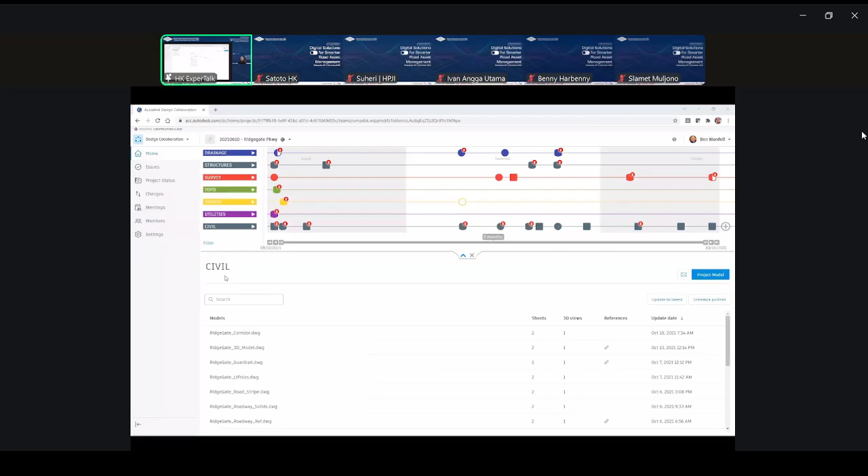Once this data has been assembled, design disciplines can share CAD files and the surface or terrain with other disciplines using the Design Collaboration module inside ACC, Autodesk Construction Cloud. Here, the survey team is sharing the existing features and the existing ground surface. The other disciplines can consume these shared files, and in this case the civil team uses them as reference or base files in their designs. They can preview the files in ACC prior to consuming them.

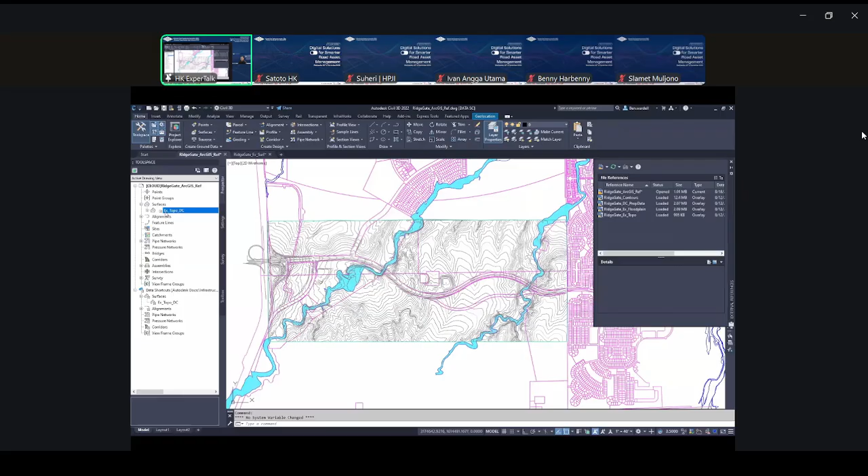Back to Civil 3D, the Civil team will consume the base files. Consume means download, by the way. They consume the base files and the surface itself that was shared from the survey team and set them up as XREFs or as data shortcuts. This file can share and can occur throughout the project life cycle as teams update their design, and files are automatically updated as they are consumed.

Moving on to detailed design, as design progresses, the design teams can start to develop the plans, specifications, and estimates. The tools are in place to create accurate and intelligent design models that can efficiently represent all aspects of the projects. For example, accurate models with properties data, detailed design for bridge, drainage, utilities, plan sheets, cross sections, quantity takeoffs.

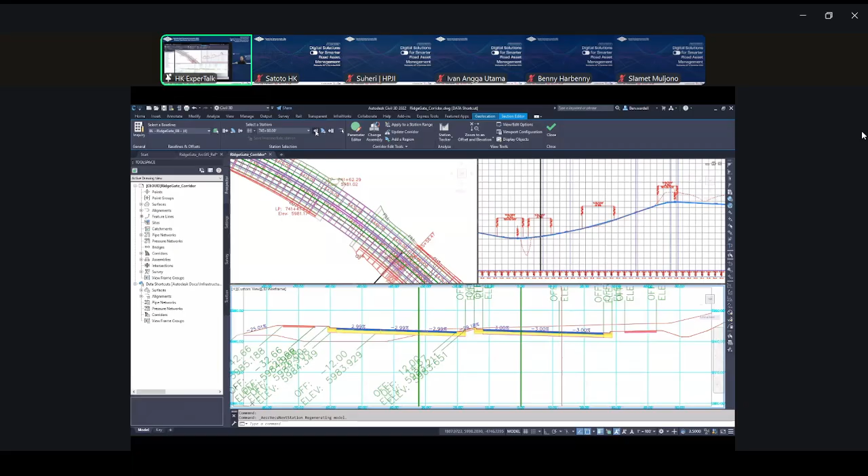As you can see in this video, detailed designs can proceed using Civil 3D, where the roadway alignments, both horizontal and vertical geometry, can be created and modified. The roadway assemblies can also be developed to create the detailed corridor models. The earthwork quantities can be calculated and displayed in the cross sections. Designers can use Dynamo for Civil 3D to run routine or complex tasks, like automations, and add additional elements to create complete roadway models.

The engineers can use the tools within Civil 3D, perhaps the drive functions, to fully inspect their models for any issues. The structural engineers can link the corridor models back in InfraWorks and create a bridge or perhaps a tunnel to determine all the bridge materials, dimensions, and parameters. Again, the information is the asset here.

They can take these same models into Revit, where they can review the bridge layout and section details. They can also fully configure the rebar details.

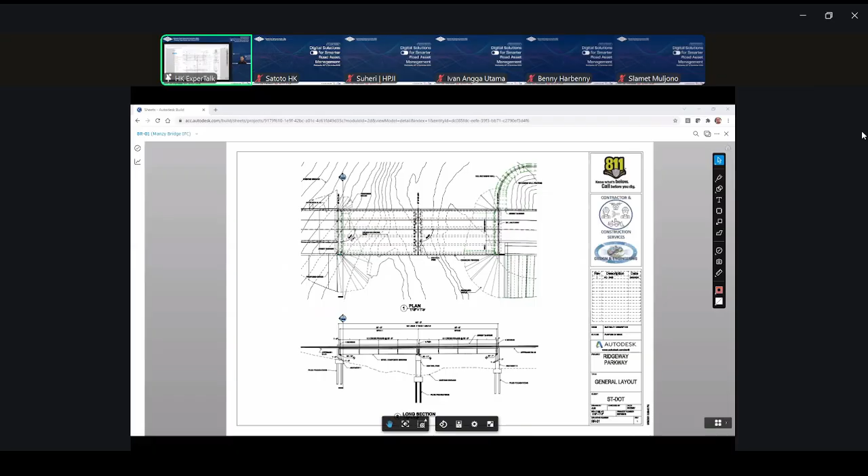In these videos, you can also see the plan sheets can be set up and easily maintained in both Civil 3D and Revit. When plan sheets are uploaded to the projects, the Autodesk Construction Cloud will automatically scan the drawings to assign sheet numbers and titles based on the sheet contents. Search text can be added by the users. Sheets can be accessed and reviewed by the project teams in the office or in the field. The sheets and files can be used as reference documents during the design review.

Let's talk about the design review, our next topic here. Reviewing designs doesn't have to be complicated. With Autodesk Construction Cloud or Autodesk Docs, all your project files are centralized in one user-friendly platform, making collaboration seamless. You can share, view, and annotate designs in real time. No more scattered feedback or disconnected communications. Whether you're in the office or working remotely, Autodesk Construction Cloud and Autodesk Docs keep your design review process smooth and efficient, helping project teams work together and deliver better results.

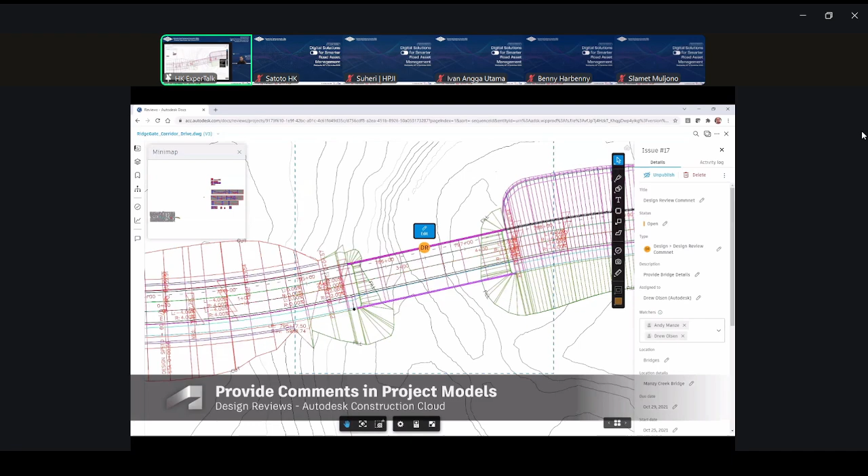Okay, so moving on. With the Autodesk Construction Cloud, the design review process can be a collaborative journey that goes beyond boundaries. You can easily access and share design files, and allow team members on your own projects to view and annotate with ease. Not only for internal project team members, you can also send and share it with external parties, and gone are the days of sorting through emails and WhatsApp for feedback.

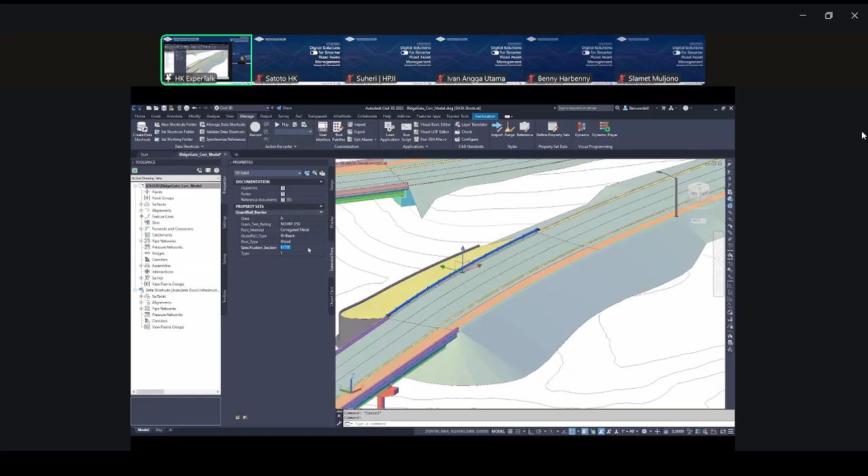We can use this platform for real-time comments, ensuring insights are shared instantly. It can drive a cohesive and dynamic review process, whether you're part of the internal team, working remotely, or working with an external party.

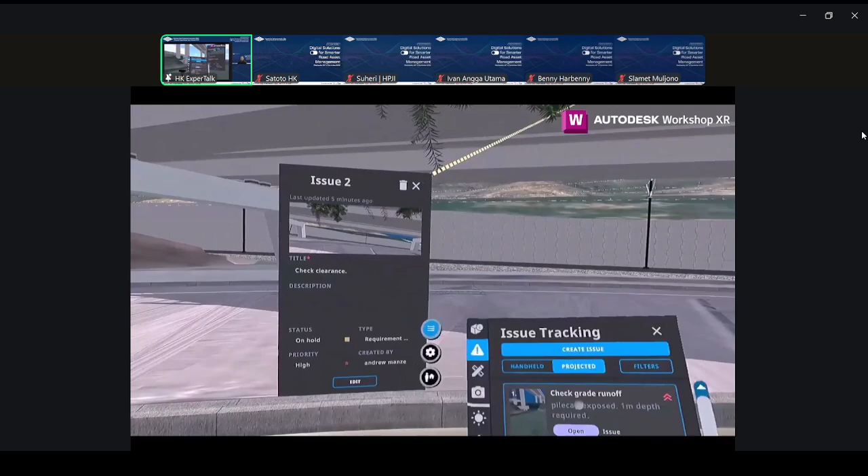So ACC can empower you to contribute effectively, making design review a smooth and productive effort. In this video, we can see how visual collaboration brings your projects to life. You can bring everybody into virtual reality here. With ACC or Autodesk Docs, your project teams can share and review models and drawings in real time — we call it Workshop XR. This means everyone, not only the designer but also the contractors, can access the latest visuals and provide instant feedback, keeping the project moving forward together.

You can also set up a meeting room inside this platform. You can hold meetings, send invites to other team members, and do real-time checking inside the models. This helps everyone stay aligned on the project vision.

Moving on to model conditioning. Now that the design has been developed, let's move into pre-construction. The metadata and asset data is added to the design models, and this information will be used by contractors in the field.

For example, in this video, engineers and contractors can coordinate model details to include the variable metadata. The design team can add pay item data into the corridor and easily extract a summary of quantity. This pay item data is shown in the roadway models.

Sorry, give me a little bit. Give me a minute.

Sorry for that. So this pay item data is shown in the roadway models, for pavements, sidewalks, curbs, and gutters. These same models, the Civil 3D files, can be viewed in the ACC viewer where the same metadata and property set information can be viewed and documented — that's the importance of collaboration.

The next topic is reviewing the construction itself. All the models — roadway, utilities, drainage, or even structures — can be brought together in an aggregated model in the cloud, which can be viewed in the field or in the office. The Autodesk Construction Cloud will show object clashes to help contractors and designers determine issues prior to them becoming problems in the field.

You can run the models to evaluate the schedule and construction sequencing. In this video, using the model coordination module inside ACC adds insight to the constructability review process. You can view the models and set them up to review general or specific model details. The clash detection feature allows engineers and contractors to review any potential conflicts.

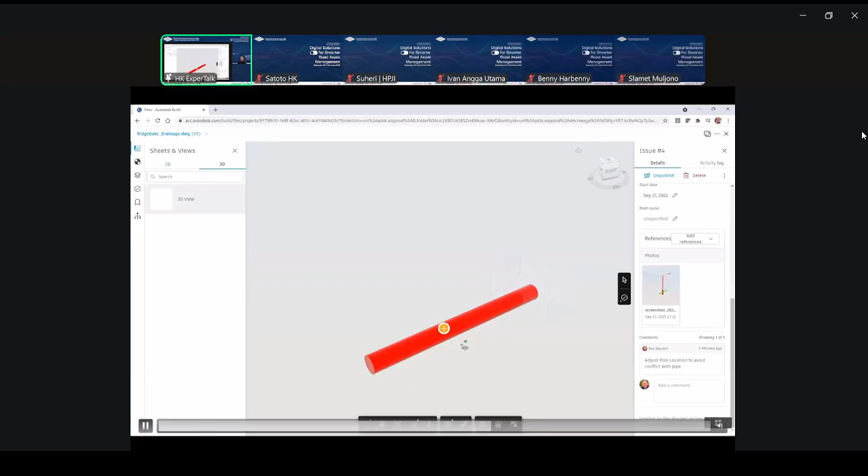These Civil 3D files, images, and sheet files can be referenced in the issue. You can also reference other photos and videos, by the way. Once the design is updated, engineers can post the updated design models and compare the changes to ensure they have been made. Construction schedules can be added in Navisworks to simulate a 4D build sequence.

To outline the sequence of construction tasks, like what we've shown in the video, so we can move into the field executions.

Here in the field, the contractors have access to the plans and to the files that represent the design intent. Field execution is about digitizing the execution process, moving from clipboard and inspection forms to digital documents, tracking submittals and requests, all in one digital platform. This brings the field process, digital plans, RFIs, field inspections, photos, and progress tracking to the project, made available downstream. Nothing can be lost in this process. These become living documents with a trackable history, and you can also put your point clouds into this ACC.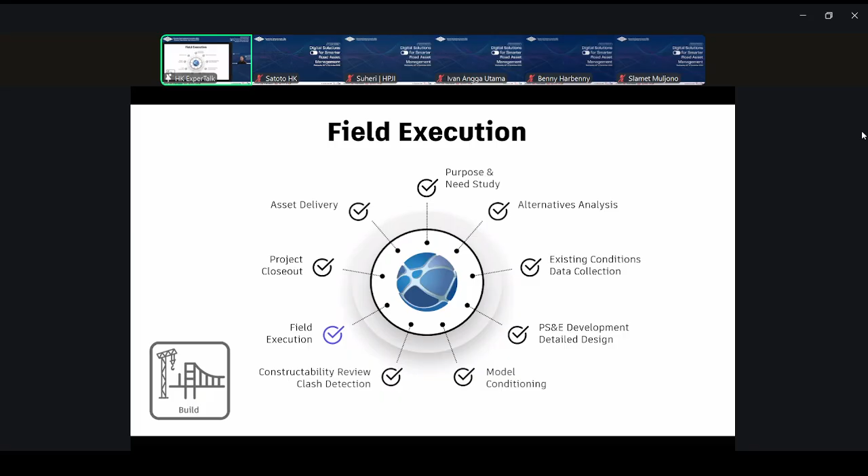Next, the contractors can create an RFI, a request for information, to request project details. Here, the contractor is asking an inspector to look at a culvert identified as a potential issue. The contractor has access to the project files and sheets and can provide markups and comments on the plan, and can also add images from the field. This information is then assigned to the field inspector, who can provide additional details or reference information if needed. In this video, he uploads an inspection video of the culvert.

The RFI, the request for information, is then assigned to the engineer of record, who makes any needed changes to plans or models as a result of the RFI. The RFI tracks the entire request history and is closed for distribution.

So everything can be tracked. All of the historical data can be tracked inside the platform — not only for the models themselves, but also the historical data or metadata. That's one of the main key takeaways from this slide.

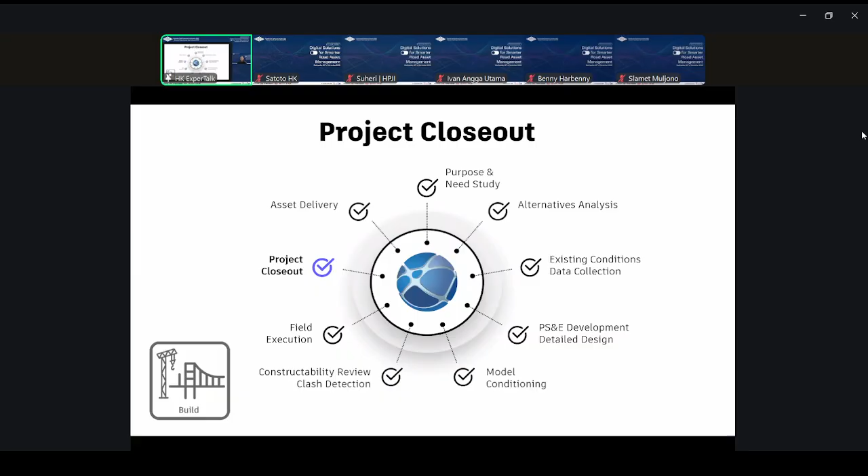So I think this is the final slide about project closeout. Guess we are running out of time. With access to the plans and files, the contractors can also provide the as-built data from the field and note the changes on the drawings.

I've mentioned this several times already. In this case, the contractor is adding a guardrail end treatment. You can also leave comments in the design files, and changes are based on field recommendations. This information can be communicated back to the design team, where the updates can be documented.

I think I can move to the next slide, because this is the most important thing in these slides — about asset delivery. In these slides, the final aggregated model is delivered to the owner with all the documented changes and updates. They now have a comprehensive data set, having been able to track progress and follow the workflow throughout the project.

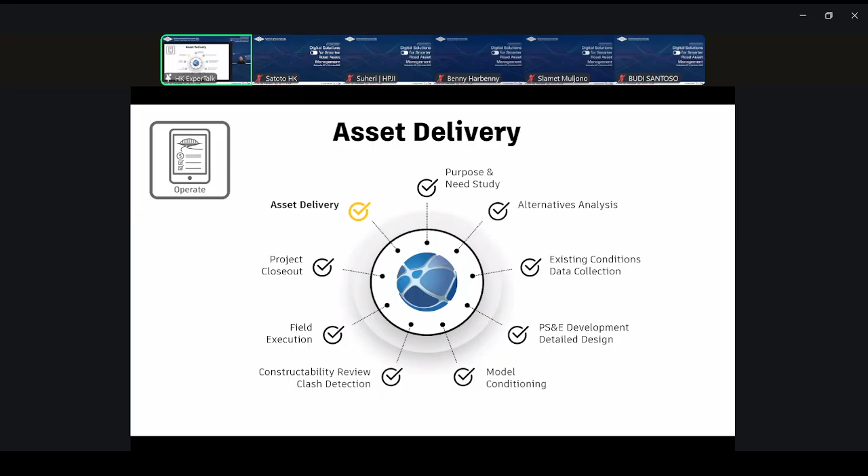So just for illustration, in this final phase of operations, the owner has access to all the documents and can aggregate the models created by the design team and the contractors. Specific asset data and property set details can be utilized to provide more information about specific project elements. Here, the model is showing the asset card data for the bridge abutments. This data can be reviewed in InfraWorks, Revit, and ACC. The final project's details are published to ArcGIS, perhaps, for future access with the same attached metadata.

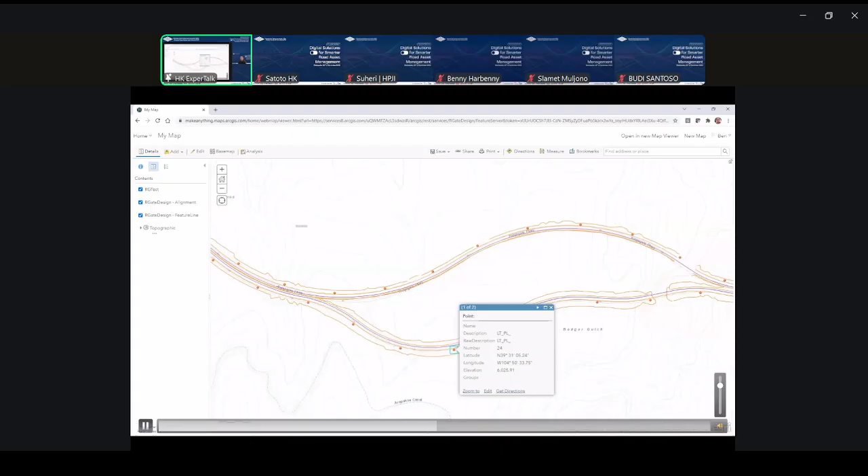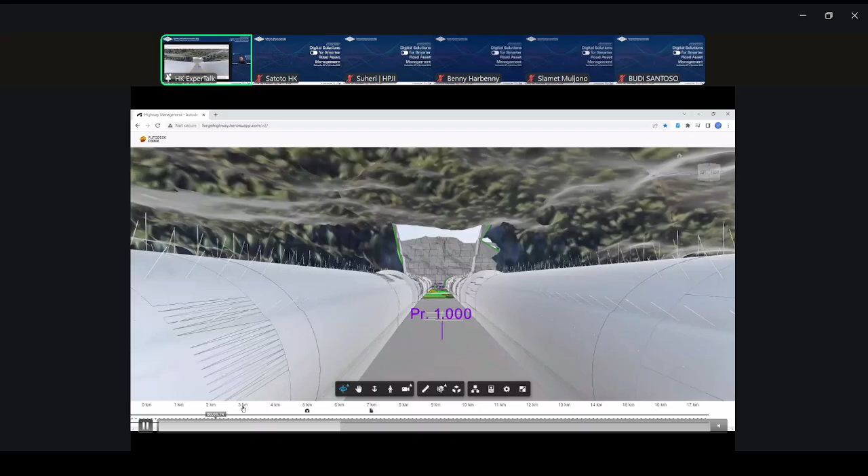Okay, the next option to create the digital twin is by using the Autodesk Platform Service. I guess the Ministry of PU is also using APS based on their dashboard at beam.pu.go.id — correct me if I'm wrong. The URL is beam.pu.go.id. You can see it's based on Autodesk Platform Service, and this is one of the examples — not from PU, but from other regions. You can see the highway operations using this APS.

So using APS enables the teams to capture photos and access live CCTV feeds directly from the platform, because it's an open API.

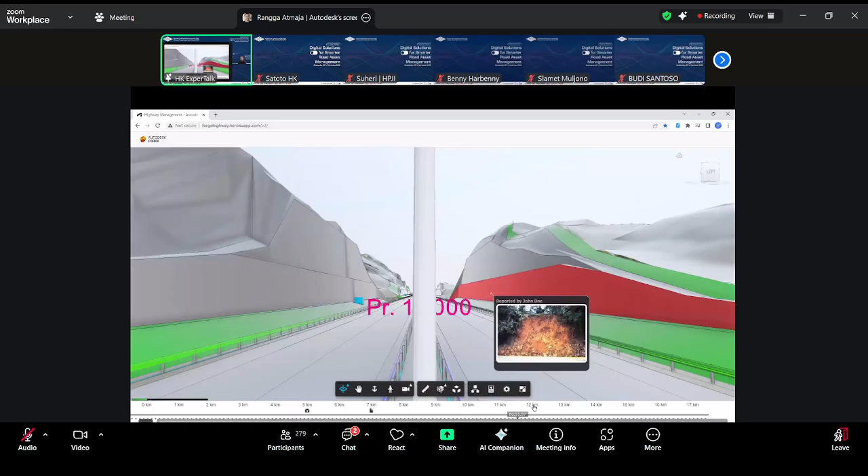So it can give the project stakeholders real-time visibility into the site conditions. These integrations of visual data can help to improve the monitoring, safety, and decision-making, making the highway management more efficient and responsive. As you watch, you can notice how these digital tools bring together field data and live imagery, empowering teams to collaborate and solve challenges faster than ever before.

Okay, I have this final topic about content catalog, but I guess we have limited time, so perhaps just one minute left, Mr. Rangga. Okay, fine, thank you for the reminder. I guess I can just show you this final video.

Okay, so this is an illustration. You can get a full picture of content catalog - basically how you manage all of your BIM contents inside of the projects, inside ACC. So you can use the unified platform, no need to put it everywhere. You can put it inside your docs or ACC, and you can capture all of the contents inside of this management, which we call content catalog. It will make it easy for your company to organize your firm's internal BIM content.

You can preview the assets with thumbnails and keep track of every version, so you're always working with the most accurate data. You'll see how granular the search is - you can search all of the content to find exactly what you need, whether it's a specific family parameter or perhaps a subassembly for the asset types. This means less time searching and more time designing.

That's also one of the key takeaways - the customizable categories and tags can help your team stay organized. You can customize it, and it has flexible input support for a wide range of formats and workflows.

Okay, I think that's all for my slides. Thank you very much for joining the sessions. We have explored the Autodesk connected solutions from plan to operate, from design to construction, and also asset management using APS and content catalog. So I hope, on behalf of Autodesk, you guys can empower your project teams to collaborate, innovate, and deliver better infrastructure projects. Okay, thank you very much. I pass it on to you, Pak.

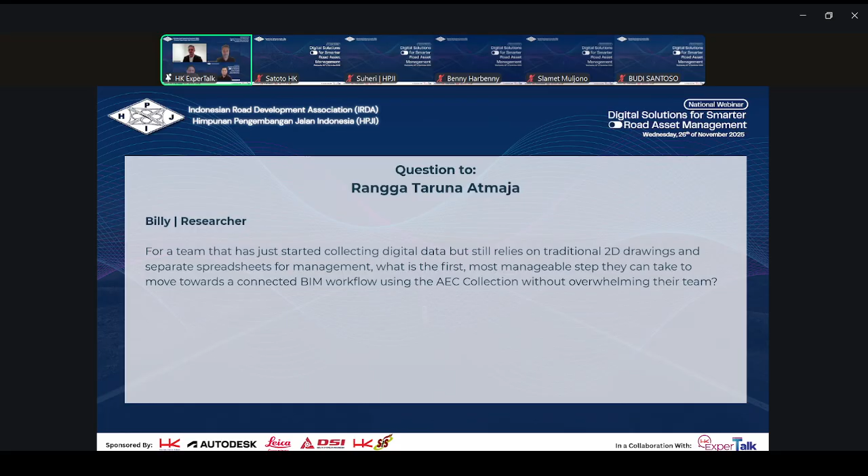Thank you, Mr. Billy, for the question, and thank you Mr. Rangga for your explanation. Next question for Mr. Rafael Godard, from the committee - this one is from Ms. Ida from ITB.

For a large-scale province-wide road inventory project, what's the practical implementation strategy? Would you recommend a centralized mobile mapping team covering the entire area, or is it more effective to equip multiple regional offices with the technology? What are the key logistical considerations? This is the question for Mr. Rafael Godard, please.

Thank you for the question. It's all about how frequently and how challenging the connections are between the different provinces. As I mentioned during my presentation, our mobile mapping solutions can capture hundreds of kilometers per day, and we have multiple customers doing this successfully. That said, you could imagine maybe one solution is enough - you could cover your whole country with one solution, but it would be occupied every day, capturing every day. If you want to be more efficient, maybe it would be wiser to have distributed solutions around your regions. But I would really be happy to discuss this in more detail with you, because it really depends on how complex the connections are between the different regions and what kind of network we're talking about, just to tailor the solution exactly to fit your need.

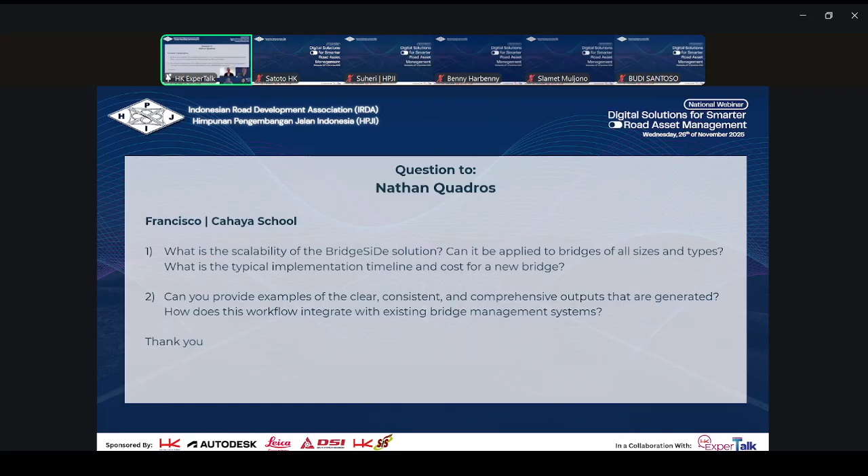So from Mr. Iksan, HPJI: the handover from construction to operation is a critical failure point for data. How does the Autodesk Construction Cloud specifically facilitate a smoother, more reliable data handover to ensure that the as-built model received by the asset owner is accurate and rich with the necessary information for future maintenance?

Okay, please Mr. Rangga. Thank you, Pak Novias, and thank you Pak Isan for the question. The obvious answer is that you need not only the constructions or designers, but also the owners to be in the same hub inside of your ACC.

If we talk about the Autodesk Construction Cloud, all of the participants, the owners, need to be inside one hub. By using the asset tools inside the Autodesk Build modules from ACC, you can easily transfer your data into the owner's side. That's also part of the requirements from ISO 19650, right? You can read and learn from the ISO to create the best way to manage data inside your project. Again, all of the project stakeholders need to be inside one hub, one project, so you can turn on, turn off, or hide and use the project assets and models to hand over your data to the owners.

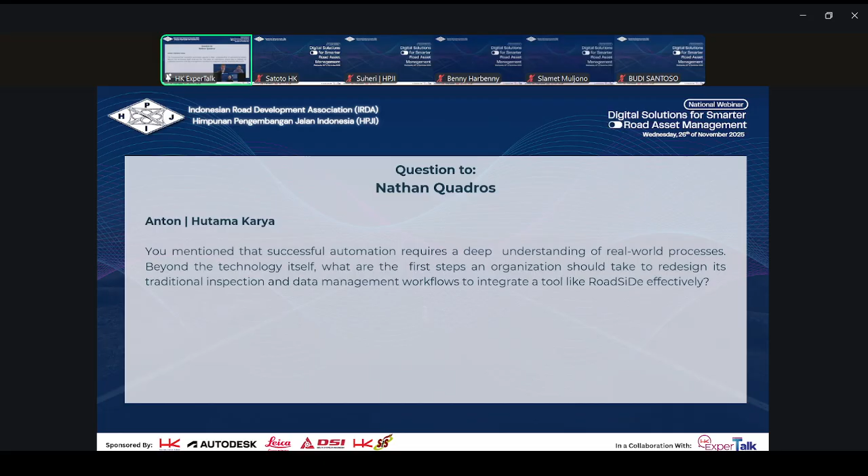Okay, this is from Aulia from Hutama Karya. For an agency that has started collecting digital data, but still relies on traditional 2D drawings and separate spreadsheets for management, what is the first most manageable step they can take to move toward a connected BIM workflow using the AEC collection without overwhelming their teams?

I believe I've answered these questions already. I think you already answered this question, yeah? Yes, correct, in the first question. So maybe my question is the same, because I want the advice also from you, Mr. Rangga. What is the one piece of advice you will give to a local government agency just starting its digital asset management journey? Because this is from a different perspective, we want to hear also from you, Mr. Rangga. Thank you, please.

Okay, so thanks for the question. I believe never ever have silo mindsets, that's the one key takeaway. So collaborate more and don't shy away from learning from every stakeholder or other parties outside of Indonesia. That's a good way to learn the best practices from all over the globe. Perhaps echoing what Nathan Quadros also said, start small, and from that you can move along continuously from there. Just consistently do the digital transformation, especially in construction. I think that's all, Panof.